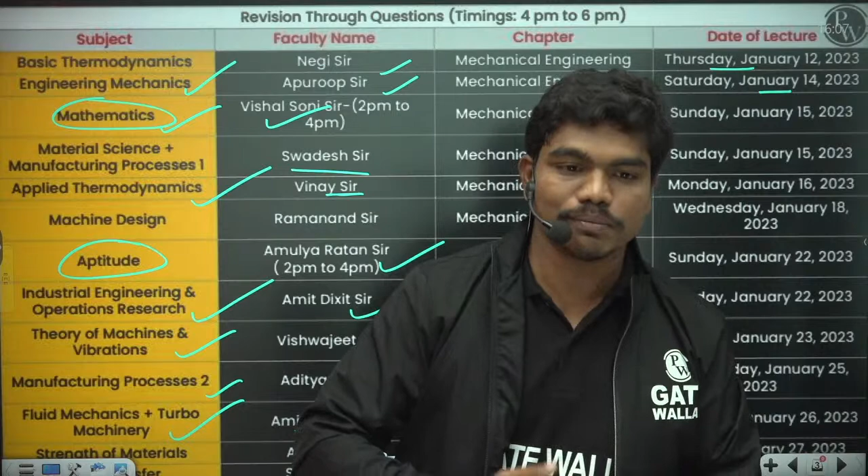Okay, so we will go in a very detailed way. You might have seen the previous sessions, which might have given you some good idea on how to solve questions and use concepts. In today's session we will go a step ahead in solving questions of applied thermodynamics.

This is our most powerful and tremendous team, a very good combination of people. For thermal, Negi sir, myself, Sandeep Chandrakar sir, and Amit Moya sir take care of this thermal module. For design, we have mechanics covered by Vinod Dasulia sir, Vishwajeet sir, Apuroop sir. For IE and OR, we have some of the best faculties in this GATE domain, like Swadesh Kumar Singh sir, Aditya Paul sir, and Amit Dixit sir, and machine design by Ramanand Bansal sir. We have a very good team.

Some of us have great exposure to industries. Previously, I was working with Hindustan Petroleum and then later with BARC. Similarly, many of our team members have very good industrial touch, so whenever we discuss concepts, we can give you real-time examples.

In today's session, I will also talk about gas turbine power plants, which I used to work on somewhere in HPCL. We'll discuss why we do intercooling and all these things on the go.

So, are you all ready? Shall we start these questions? Definitely, I have kept some questions matchable to GATE level, but a few questions are slightly more than GATE level. Okay, let's start the first question.

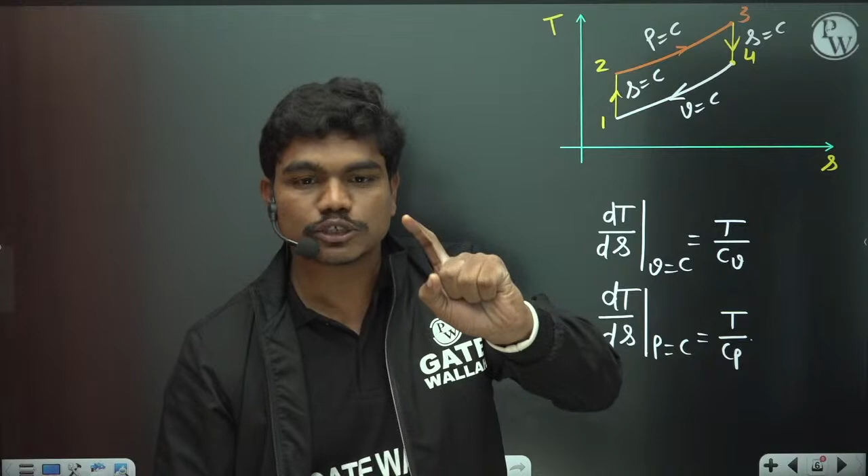The reason being, whenever Cp is greater than Cv, this quantity is low as compared to this quantity, so the slope should be higher for the constant volume line. This has to be made a note. Anyhow, these are the two curves.

Now let us see here. They are asking you initially the cutoff is at 5% of the stroke. So let us take the PV diagram also for our analysis, because this could also help you in talking about volumes. So pressure and volume, now we have a compression stroke.

Let us say this is the initial state of the volume. So we got a compression stroke actually here till this point 2. Then at constant pressure we do fuel supply. So this is point 3.

So we are doing constant pressure fuel supply. Then we have isentropic expansion again to state 4, and at constant volume heat rejection.

So here in this cycle we have work input and work output in the expansion stroke, and also some partial work output in this case. We have work output here as well. Then this is the stroke in which you are supplying the fuel, correct?

Now let us see, let us take the data given to us. Now 1, 2, 3, 4 and corresponding TS cycle. Now if you see, working on a standard cycle, the cylinder bore is 15 centimeters, meaning if you have the piston, the diameter of the piston is 15 centimeters, which is 0.15 meters.

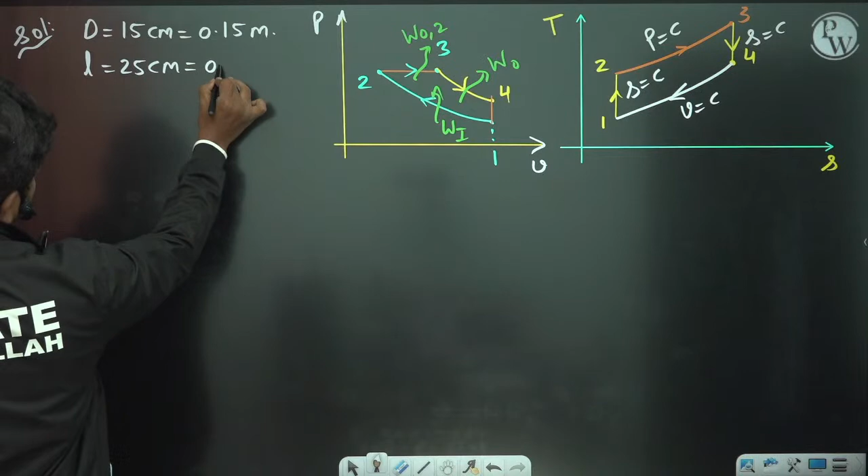Now if you see, the clearance volume is 400 centimeter cube. Clearance volume means, in this case, the piston actually moves in between these two volumes. So whenever the piston reaches here, this volume which is left is the clearance volume. So V2 I'm taking it as 400 centimeter cube.

Fuel injection is taking place at constant pressure for 5% of the stroke initially. So case 1: fuel injection is taking place up to 5% of the stroke. What is the meaning of this? Fuel injection takes place from this particular point to this particular point, so all over the movement of this piston, fuel is actually injected into the cylinder.

So V3 minus V2, where this is the span of fuel injection, this is 5% of the stroke. What is the meaning of 5% of the stroke? Stroke is this total volume, so therefore 5/100 times of V1 minus V2. This is the meaning of cutoff happens at 5% of the stroke.

Is this clear to all of you? Did you all understand how I wrote this equation? This is cutoff, meaning the volume up to which the movement of the piston, during which the fuel is injected into the cylinder, and this is the total cylinder swept volume.

So that's how V3 minus V2 is 5% of this particular value. Clear to all of you? Please type in the chat box, is this clear? Did you all understand how I wrote this equation? V3 minus V2 is 5% of the total swept volume. Clear? Okay, now let us see.

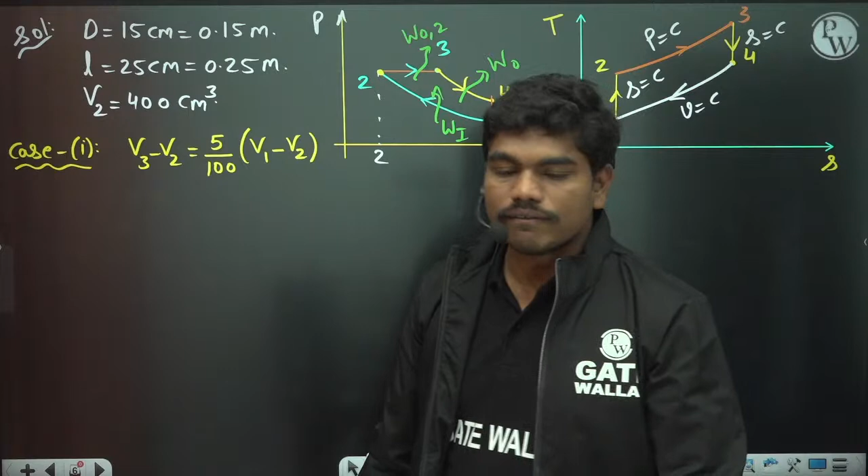This implies if you divide with V2, V3 by V2, which is the cutoff ratio minus 1, is equal to 5 by 100 times of V1 by V2 minus 1.

Now I will ask you one question, so please try to answer this. What is V1 by V2? Means if you take the ratio of volume at this location to volume at this location, what is V1 by V2 in this question? Or in general in any cycle, for example in any Air standard cycle, what is the ratio of V1 by V2?

Yes, very good. It is nothing but compression ratio, correct? So yes, compression ratio. This value is actually equal to the compression ratio R.

But you don't know what is the compression ratio. They didn't give you that in the question, correct? So how do you get the cutoff ratio here? They didn't talk about the compression ratio at all. Then how do you identify what is the cutoff ratio, I mean the compression ratio? How do you identify this?

Look, we have the length of the piston movement and the diameter of this cylinder, correct? So if you can calculate the swept volume, then the total volume available at the beginning of compression, which is nothing but V1, is nothing but V swept plus V clearance, correct? So we know R is equal to VT by VC. This V total can be written as V swept plus V clearance by V clearance.

Clearance volume is given to you, which is 400 centimeter cube. Now what is swept volume? Swept volume is pi by 4 d square. Since this is in centimeter cube, let us put this in centimeters. 15 square into 25, plus 400, divided by 400, correct? This is what you have.

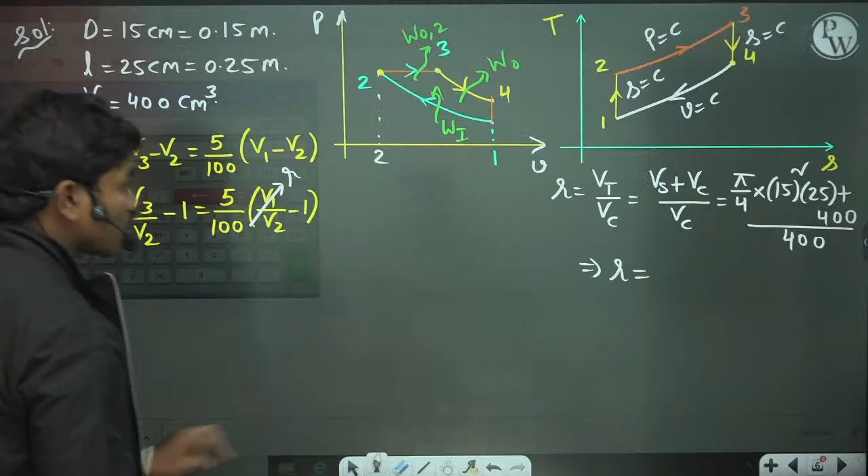15 square into 25 into pi by 4, this value plus 400, plus 400. This is the total volume divided with 400, gives you 12.04. So normally for compression ignition engines it is around 12. So 12.04. This is how we can calculate the compression ratio in this case.

So R is equal to 12.04. Clear? So whenever R is equal to 12.04, if you replace here, we get the cutoff ratio in this case. Rho minus 1 is equal to 5 by 100 times of 12.04 minus 1. So from this we can calculate cutoff. Let us say this is the first case. So rho 1 is equal to, we get some value here. Let us get this value.

2.128%, I think you're telling the final answer. Nikhil, is it? Are you telling the final answer, Nikhil? Let us see. By the time we reach the end, let us compare the answers.

So now if you see this value, 12.04 minus 1 into 5 by 100, so 0.05, this value plus 1. So cutoff ratio is 1.5522, or 1.552 to 3 decimals if you take for example. So this is the cutoff ratio in the first case.

Now let us talk about the second case. They have increased the cutoff from 5% to 8%. So here they are telling you that the fuel supply continues up to 8% of the stroke. So in second case, let us see what happens. Case 2.

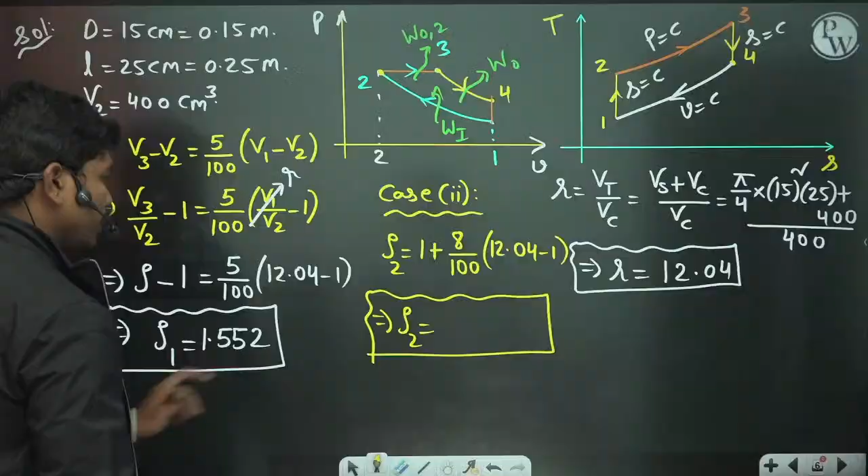So if you do this calculation, then rho 2 is equal to, what about rho 2? Let us see, rho 2 is how much? 12.04 minus 1 into 0.08, so this value plus 1. Plus 1, gives 1.8832.

1.8832. Correct. So this is the cutoff ratio here. Now we know the cutoff ratio. A compression ignition engine generally works on a standard diesel cycle. So what could be the formula for the thermal efficiency? Let us see. If you take a slide, for example. Fine, so let us see.

Thermal efficiency of diesel cycle is equal to 1 minus 1 by R power gamma minus 1 into rho power gamma minus 1 by rho minus 1. Correct, this is what we have. Yes or no? So all of you, please type in the chat box. Is this the formula for the thermal efficiency of a diesel cycle? Yes or no? Can you recollect this?

So please type in the chat box. Can you all recollect this? Thermal efficiency of a diesel cycle is given by this, where R is the compression ratio, rho is the cutoff ratio and gamma is the adiabatic index of the substance. Correct? Yes or no? Thermal efficiency is equal to 1 minus 1 by R power.

Sorry? Okay, sorry, I think I missed gamma. Okay, fine. This gamma is also there. Correct, gamma times of rho minus 1. Yes, correct, I think I missed gamma. So is this the correct formula? Please type in the chat box. There is also one gamma, correct? Okay. Yeah, gamma is missing in the denominator. Correct, I forgot to write gamma. So gamma times of rho minus 1.

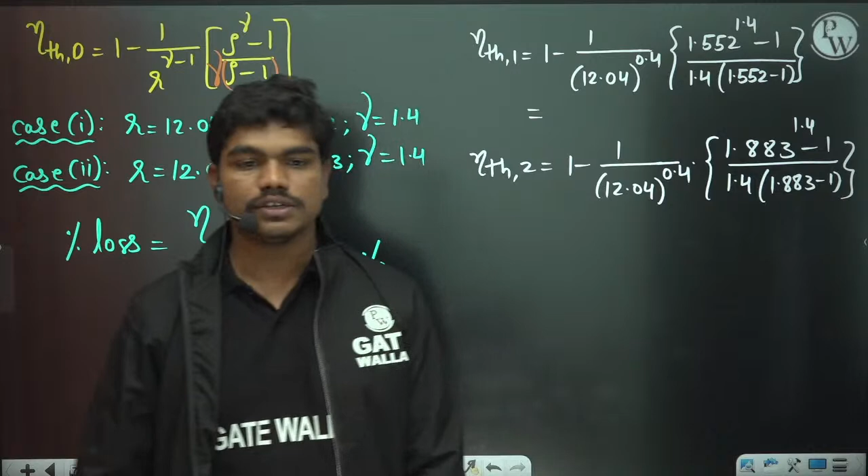Similarly, thermal efficiency of second case is 1 minus 1 by 12.04 whole power gamma minus 1 times of 1.883 power 1.4 minus 1 by 1.4 times of 1.883 minus 1. So this is what you have here. Let us compute these values. First of all, let us calculate the term 1.552 power 1.4 minus 1 divided by gamma 1.4 times of 0.552. So this is the value.

Now divide this value by 12.04 whole power 0.4. So this is the total value. Now subtract this value from 1. So 0.5933, correct? 0.5933, which is 59.3% almost. So please cross match the value. Is the first case efficiency 0.59? Please type in the chat box. Did you all get this? Is this clear to you? Are you all getting the same value here?

Now let us calculate the second case efficiency. Let us store this value for some time. Then let us calculate 1.883 whole power 1.4 minus 1 divided by 1.4 times of 0.883. If you do this, 1.15. Now divide this with 12.04 whole power 0.4, so this gives you 0.426. Subtract this from 1, and you get 0.5738, so 57.38%. Clearly 0.59 is higher than 0.57, so efficiency already came down.

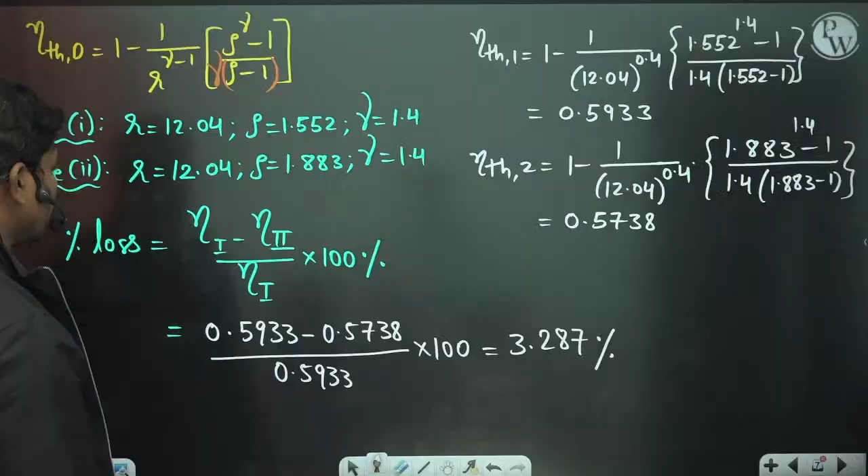Now let us see what is the percentage drop. 0.5933 minus 0.5738 divided by 0.5933 multiplied with 100. Subtract this new value from the stored value, divide with the previous value, into 100. This gives you 3.287%. Into 100 we have already done. So 3.287% is the efficiency fall when you have increased the cutoff to 8%, correct? Please type in the chat box. Is this clear to all of you? Did you all get a 3.28% fall in the efficiency of the cycle? Yes or no?

Okay, got it? I think someone told 6 point. I think there could be some calculation problem there. Okay, now I'll ask you one question. Try to understand this. Let us suppose, if you look, this is the formula for the thermal efficiency, of course multiplied with gamma. Now one question I want to ask you.

Let us suppose cutoff ratio is tending to 1, means cutoff ratio is almost equal to 1, then what happens to this term? Please tell me. We'll go to the next question, it's okay, but try to understand something here. If you put cutoff ratio almost equal to 1, cutoff ratio tends to 1, then what happens? What is the thermal efficiency in that case?

Will this fraction exist when you put rho equal to 1? For example, when you put rho equal to 1, will this fraction exist? No, correct? It won't exist. But what is the meaning of this cutoff ratio equal to 1? Look, try to understand here. When rho tends to 1, because I want to discuss one point here.

When rho tends to 1, one thing is very clear, rho power gamma minus 1 by gamma times rho minus 1, this value tends to 0 by 0 form, correct? This gives you 0 by 0 form. Now whenever a fraction is giving 0 by 0 form, what do you do generally in mathematics? You might have seen some limits. If you are getting a 0 by 0 form, then what will you do? L'Hospital, correct? Very good. So you will apply L'Hospital rule here.

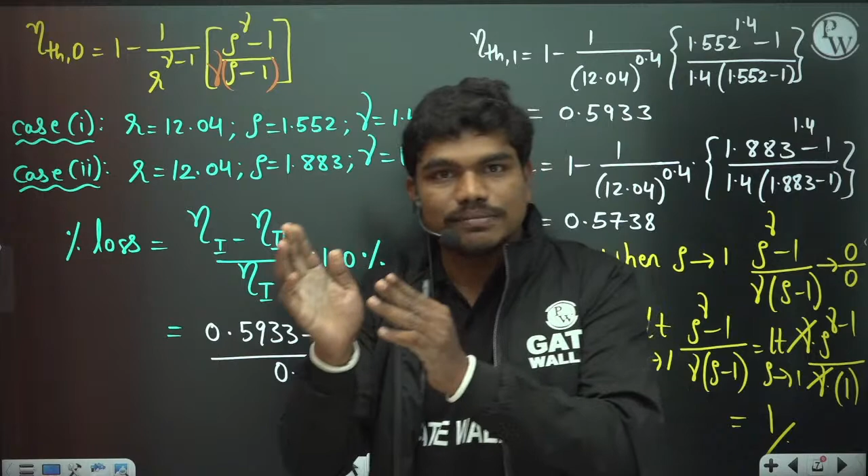Otto cycle, correct? Yes. So whenever cutoff ratio is tending to 1, the cycle converts from diesel to Otto cycle. How does it happen physically? I will tell you. Whenever you are injecting fuel, there is a movement of the piston, correct? So see here carefully. When rho is tending to 1, what is the physical meaning of that? Rho is V3 by V2.

You know this, correct? Whenever this value is tending to 1, can I say V3 is tending to V2, which means V3 and V2 are almost the same? Can I say V3 and V2 are almost the same whenever rho is tending to 1? Yes or no? Correct? Whenever rho tends to 1, V3 and V2 are very close to each other.

Now, tell me this. Whenever V3 and V2 are very close to each other, during your fuel injection, during your heat addition, your piston is not moving by a sufficient amount. Yes or no? Your piston has moved a very small amount, which means the heat addition is happening at constant volume. Because if V2 and V3 are very close, physically during fuel injection the piston is not moving. So you are actually adding the heat at very small volume change.

So you can approximate that as heat addition at constant volume. That's the main difference between the operation principle in diesel and Otto cycles: the process of heat addition. So whenever rho is very much close to 1, then definitely the heat addition is at constant volume. That's how physically a diesel cycle gets converted to an Otto cycle. And formula-wise you can see this formula gets converted to the efficiency of an Otto cycle.

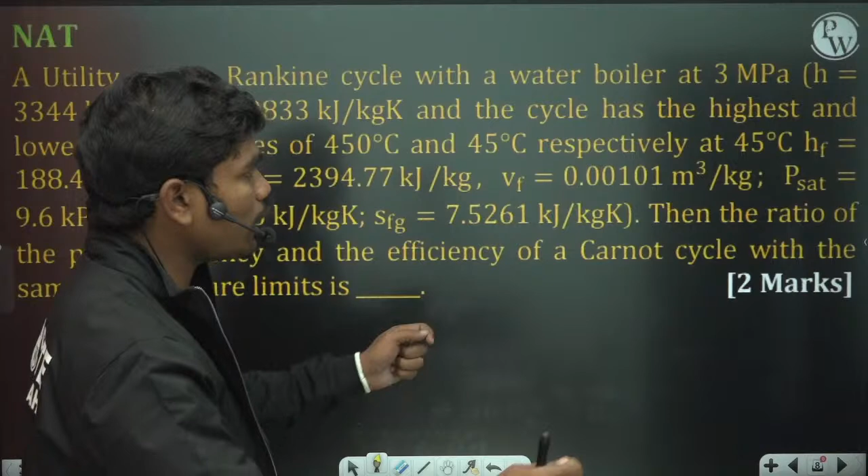So let us solve this question. A utility runs a Rankine cycle with a water boiler at 3 megapascals. The specific enthalpy at the boiler is 3344 kilojoule per kg, and S is 7.0833 kilojoule per kg K, and the cycle has the highest and lowest temperatures of 450 degrees Celsius and 45 degrees Celsius respectively. At 45 degrees Celsius, hf, hfg, vf, P saturation, sf, sfg values are given. So properties of the steam are given at 45 degrees Celsius.

Then the ratio of plant efficiency and the efficiency of a Carnot cycle with the same temperature limits is blank. So first of all, whenever the Carnot cycle is operating between the same temperature limits, you know heat addition and heat rejection happen at constant temperature in a Carnot cycle, correct? So let us see.

First of all, let us try to plot this Rankine cycle. It is running a Rankine cycle with a water boiler at 3 megapascals, and this cycle has the highest and lowest temperatures as given. Then the ratio of plant efficiency. So first, let us plot a TS diagram for the Rankine cycle. Let me draw this a bit lower, since I have some things to plot. Now let us put the dome. So TS.

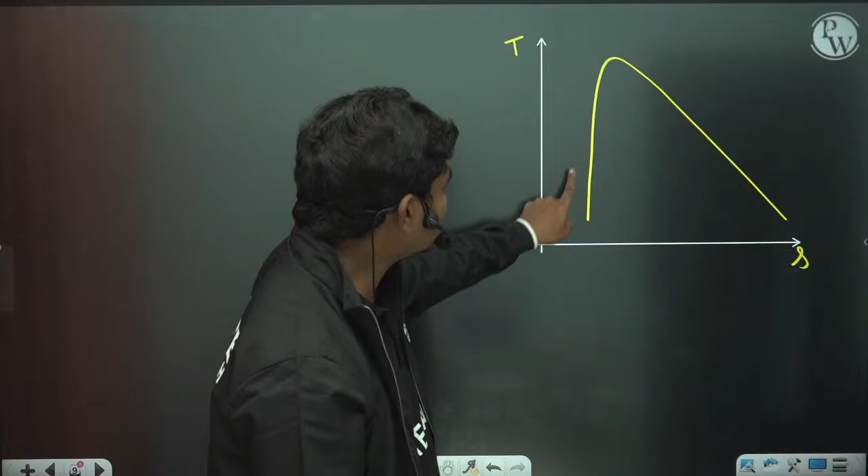Especially in refrigeration cycles, whenever refrigerants are analyzed using this TS diagram, this curve plays a very important role. There is something called the superheat horn, and you have some loss in refrigeration effect. These losses and the superheat horn depend exclusively on the shape of the curve. So this shape is important. On the left-hand side we have liquid phases, which do not show much change in properties, so it is almost a vertical line, but on the right we have a slanted, expanded line.

Now if you see the condenser limits and boiler limits, let us suppose the condenser is somewhere here, and you have a boiler here. So this is P boiler, the pressure at which the boiler is operating, and this is the pressure at which the condenser is operating. Now you have a normal Rankine cycle. There is a pump which takes the fluid from low pressure to high pressure.

If this is state 1 and this is state 2, now along the constant pressure we are heating the system, supplying heat to it. So we get somewhere here, state 3. Then from here we expand isentropically in a turbine.

So this is location 3, and 3 to 4. Let us keep this point 4, since 3 we have already used. And 4 to 1 we have condensation: before sending the fluid back to the pump, we condense it.

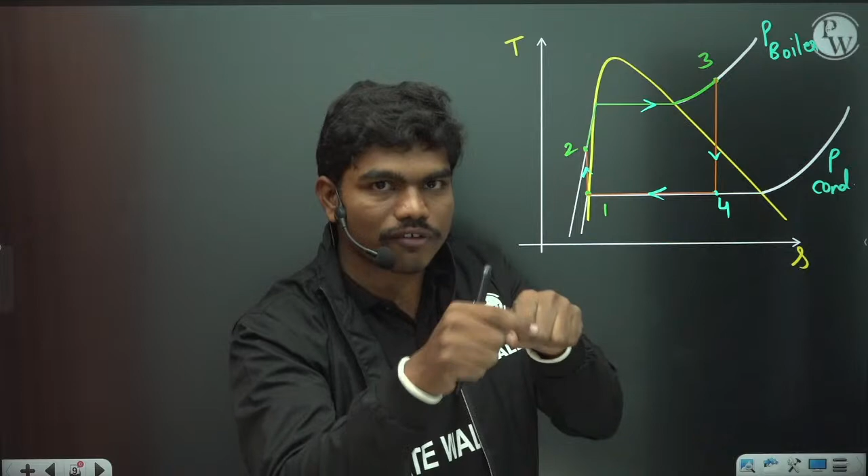Now tell me one thing, you have a condenser here. Outlet from the turbine enters the condenser, and again saturated liquid comes out of the condenser. Practically speaking, heat supplied to the boiler and the work output of the turbine actually matter to you. This heat rejection does not matter, yes or no? Because the amount of rotation for the turbine is due to the work done in this expansion process. So this heat rejection is not much significant for you.

So I have one idea. Let us suppose, instead of running this plant by putting a condenser here, I have a very large fresh water source. Then can I leave the outlet of the turbine into that lake and again pick some new water for the pump? Can I do this?

Basically, instead of having a condenser here, I will put a large lake. Fresh water lake, no impurities, nothing, so that I will put my exit of the turbine into that lake and take the inlet for the pump from some other location. Can I do this? Is there any mandatory need of the condenser in the power plant?

What happens if you take off the condenser? Boiler is important and turbine is also important. Once the steam comes out of the turbine, your purpose is solved, you don't have any use out of it, because it is getting rejected in the condenser. Then can you run a power plant without the condenser? If you cannot, then what is the problem? So please tell me.

Did you all understand my question? Please type in the chat box. Why is it mandatory to use a condenser in a power plant? Or if it is not mandatory, then please justify. What can you do? Any idea?

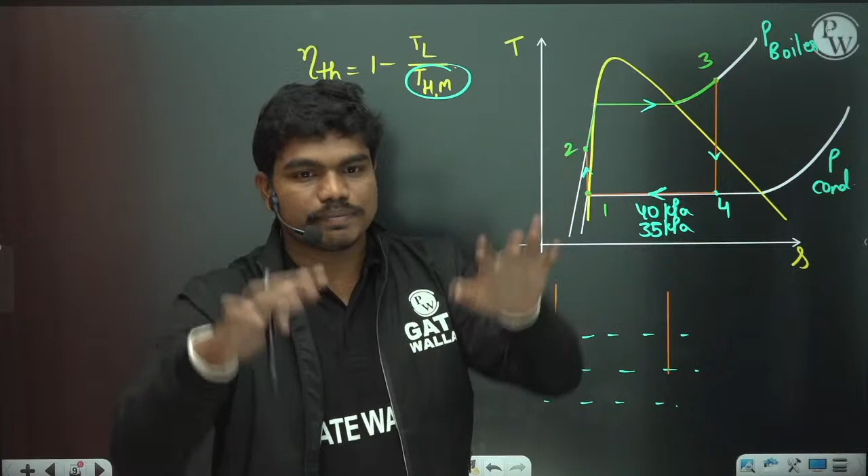Okay, so whenever this heat rejection happens at this particular range, the saturation temperature corresponding to this pressure is lower than the saturation temperature at atmospheric pressure. When I am leaving the exit to the water, condensation is happening at atmospheric pressure, because it is open to atmosphere. But when you are putting a condenser, you are actually bringing the system to much lower pressure, so that this saturation temperature of phase change is less, so this TL is less. So if TL decreases, this temperature value decreases, so thermal efficiency of the plant increases.

And of course, if you can also see, whenever this constant pressure line, instead of 40 kilopascals, is at 100 kilopascals, something like this, then your turbine does expansion only from this point to this point, then this amount of work is lost, but the boiler heat what you are supplying is same. So for the same heat supply, you are losing some part of work here. That's why practically you cannot remove the condenser. By removing the condenser, you may feel that condenser cost can be saved, but your efficiency of the cycle falls drastically. Clear?

Okay, so did you understand? Because this is one very famous question in many of the interviews, that they'll ask you why condenser is mandatory in a power plant. This is the reason, and the answer is from the second law of thermodynamics point of view. Clear? So is this clear to all of you? Did you understand how turbine work output falls and the cycle efficiency falls as I said?

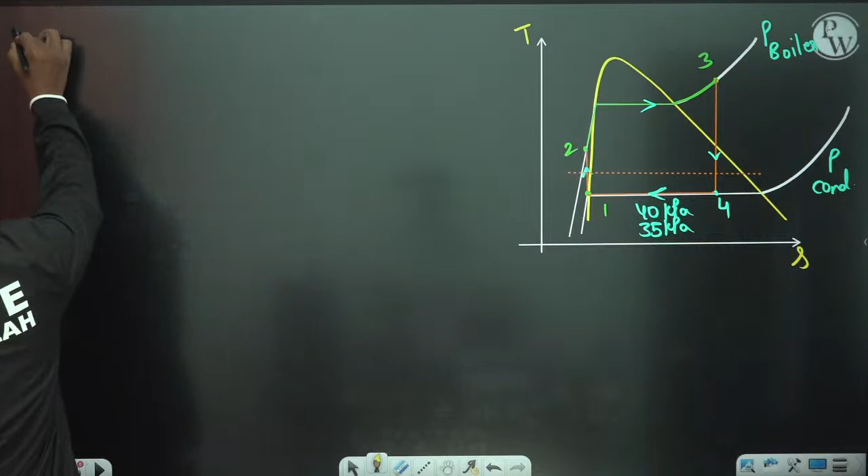Okay, now let us solve this question. These are some points I thought of discussing when I'm talking about Rankine cycle. So let us see. First of all, whenever Carnot cycle is operating between same temperature limits, T max is 450 degrees Celsius, which is 723 Kelvin. Because 450 plus 273 gives you 723. And T minimum is 45 degrees Celsius. So 45 degrees Celsius is equal to 273 plus 45, so 318 Kelvin. Now, if Carnot cycle is operating between these two temperatures, what is Carnot efficiency?

Efficiency of Carnot is equal to 1 minus T minimum by T maximum. So this is 1 minus 318 by 723. So let us do this calculation, all of you. 318 by 723, take a negative of this and add 1. So 56% almost, 0.5601. 0.5601 is the efficiency of the Carnot, almost 56% efficient.

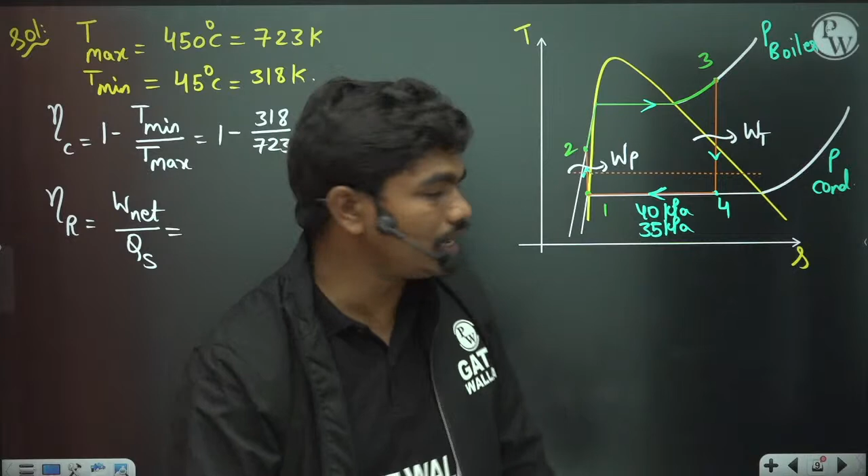In a Rankine cycle, we generally neglect the pump work. The reason is, since pump is an open system, the work interaction of a control volume is minus integral VdP. Here the pressure ranges from condenser pressure to boiler pressure. But this specific volume will be very less because pumps handle liquids, and in liquid phase the density is very high, which means the specific volume, the reciprocal of density, is very low. For water, density is 1000 kg per meter cube, so specific volume is 10 power minus 3. That's why the pump work in Rankine cycles is generally neglected.

If you asked about the compressor in Brayton cycle, can you neglect the compressor work in Brayton cycle? Type in the chat box. Can you neglect the compressor work in the Brayton cycle? Can you neglect it?

Can you neglect compressor work input in case of Brayton cycle?

Yes, we cannot neglect it. Because compressors handle gases, and for gases densities are very low and specific volume is comparatively very high. Here specific volume is 0.001 almost, but if you take substances like air, then it is around 0.96 to 0.98 of that range. So you cannot neglect it actually.

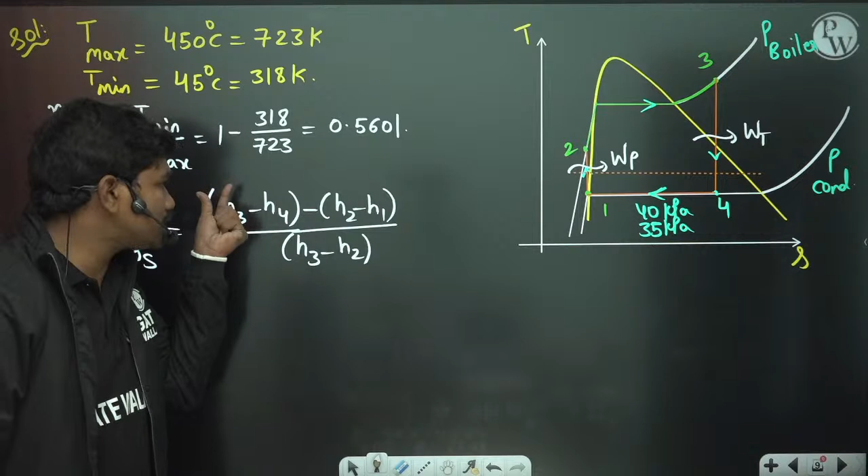For example, if you write the formula completely, heat supplied is H3 minus H2. This is the enthalpies, this is the work which is produced. This is the work interaction which happens in this turbine, and this is the work interaction of the pump, and this is the heat addition in case of a boiler.

Now let us talk about the things. HF is given as 188.42 and HFG is given as 2394.77. VF, VG are also given. It runs on a Rankine cycle with a water boiler at 3 megapascals. At that condition, at superheated condition, this is specific enthalpy and this is specific entropy. Let us see this pump work.

If you neglect this pump work, since pressure values are given, right? P saturation is also given at this condition. P saturation is 9.6 kilopascals. Let us not neglect, let us take this pump work also into consideration.

H2 minus H1. So first of all, what is H2 minus H1? Let us calculate. H2 minus H1 is equal to, since this is running on water, V into P boiler minus P condenser. So what is P boiler minus P condenser?

Specific volume of water is 10 power minus 3. Boiler is operating at 3 megapascals, which is 3000 kilopascals, minus P saturation at the condenser, which is 9.6 kilopascals. Such a low pressure, 9.6 kilopascals. So this answer, if you take in kilojoule per kg, then 3000 minus 9.6, divided by 1000, gives 2.99.

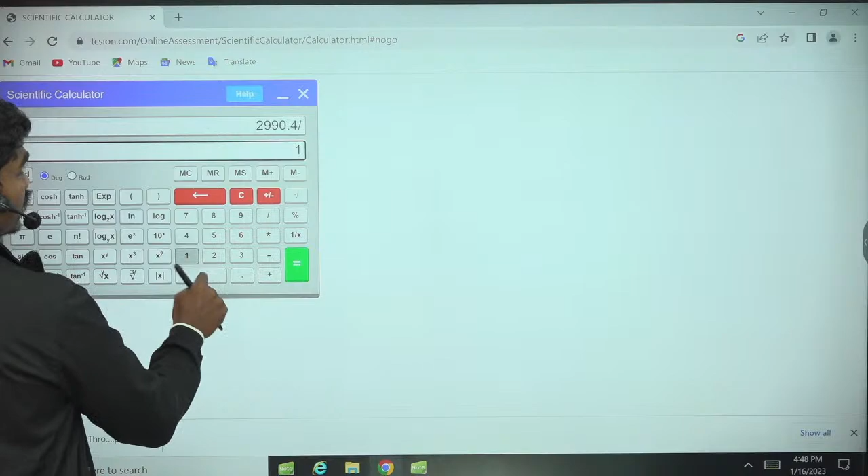Kilojoule per kg. Then W, or generally H3 minus H4. Now to calculate H4, we should know one very important parameter, which is called the dryness fraction. We should understand what is the dryness fraction at this location. So how to calculate this dryness fraction?

We can write, if you equate specific entropy at location 3 and location 4, you can get the dryness fraction. So S3 is same as S4. What about S3 at the exit of the boiler? 7.0833. This is equal to, at this saturation condition, SF is 0.6386.

0.6386 plus dryness fraction at that location into SFG. So what is SFG value? 7.5261. So this implies X, dryness fraction, is equal to 7.0833 minus 0.6386, this value divided by 7.5261.

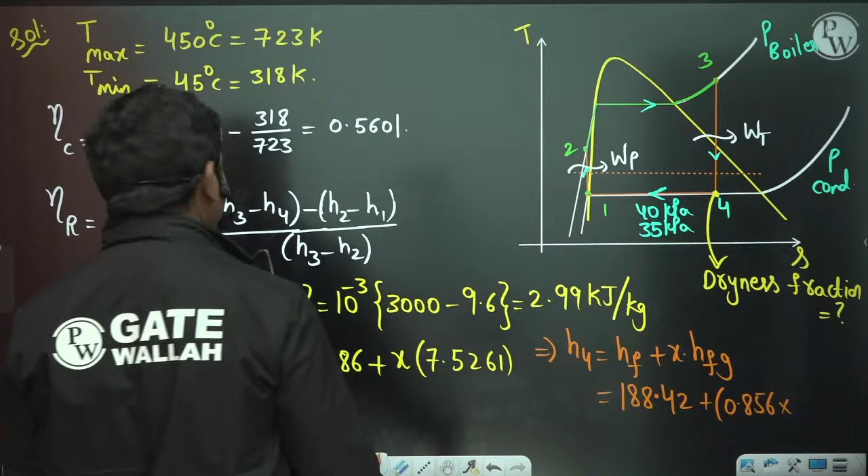188.42 plus X, dryness fraction 0.856, into HFG. So what about HFG? HFG in this condition is 2394.77. So if you simplify this, then we get H4 value, in kilojoule per kg again.

So let us do this. Dryness fraction multiplied with 2394.77, so 2050, plus 188.42, so 2239.09 kilojoule per kg. So we know H4 value. H3 value they have given you.

H2, so how to calculate this H2? HF plus this work input to the pump. Specific volume they have already given as 0.001, almost, because density of water is 1000, so reciprocal of that is this value. Now if you put all these terms together, Carnot efficiency.

So what about Carnot efficiency? Let us see.

Carnot efficiency, Rankine efficiency is what we want. Rankine efficiency is equal to H3 minus H4.

So what about H3? This value 3344, minus H4. What about H4? 2239.1, minus pump work. What about pump work? 2.99, you can write 3, almost 0.01 doesn't give you much difference, divided with heat added in the boiler.

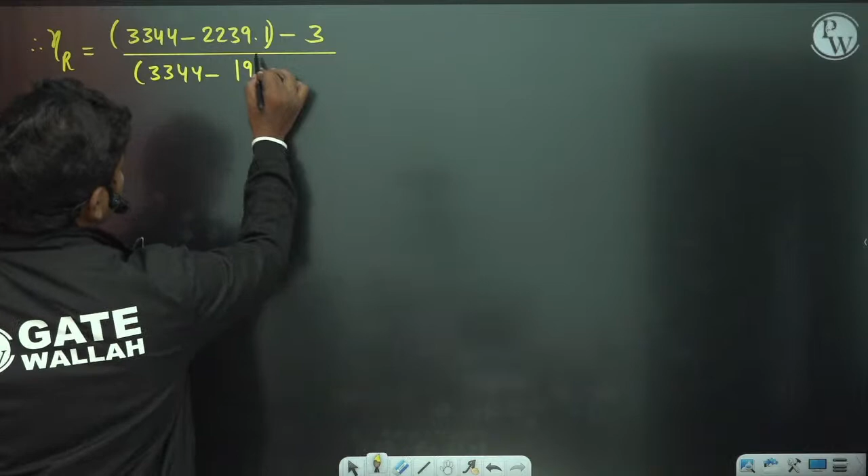So this gives you the thermal efficiency of this cycle, of the Carnot cycle, of this Rankine cycle.

So therefore thermal efficiency of Rankine cycle is equal to, let us calculate this value. So let us calculate 3344 minus 2239.1

minus, okay so minus 3, so this value divided with 3344 minus 191.42, so 0.3495

0.3495, so 35% almost. So this is 0.3495, so the Carnot efficiency is around 0.56 we got, and Rankine efficiency is 0.3495 actually.

So therefore efficiency of Rankine to efficiency of Carnot, correct? This is what they are asking in the question. So they are asking you the ratio of plant efficiency and efficiency of the Carnot cycle. So plant efficiency is this, whatever we have calculated.

0.3495 divided with, we got some value here for the Carnot cycle, 0.5610, correct, 0.5601. So this value divided with 0.5601, so 0.624 is the ratio in this case.

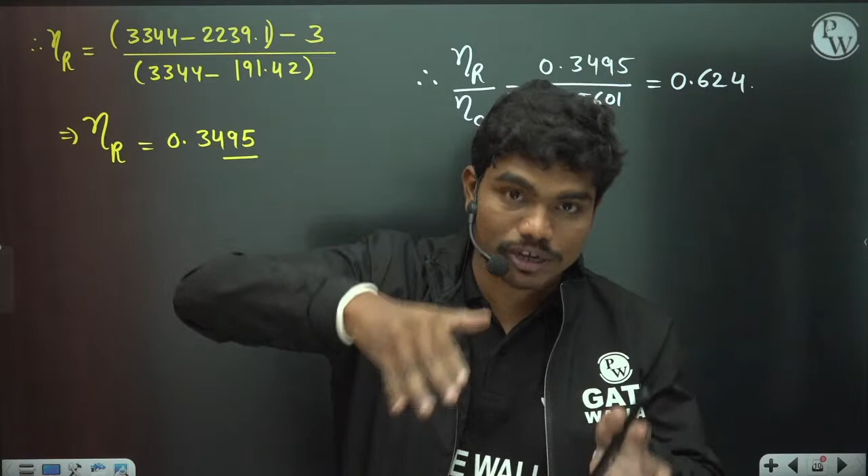So in Carnot assumption, we assume complete heat is transferred at constant, uniform temperature. But in case of Rankine cycle, at one particular point you are touching 450, that's it. Remaining maximum amount of heat is added at low temperature. So heat addition at low temperature is not as effective as heat addition at higher temperature. This is based on the concept of availability, so that's why definitely Carnot has maximum.

If you look, Carnot says all reversible cycles have equal efficiency operating between same temperature limits, but here the heat addition is actually changing. Here you are not adding the heat completely at 450 degrees Celsius, you are adding only a very little part at 450 degrees Celsius, and all the remaining part at low temperature. So that's why Carnot efficiency will definitely be more than this Rankine efficiency.

Clear? Your concept of availability actually answers this. And one just practical thing I want to tell you before going for the next question.

We'll move for the next question, but just one thing: this dryness fraction at the exit of the turbine is very important. This X value is normally maintained 85 to 90%, or sometimes in case of reheating, 93% and above, but practically this X is very important actually.

Because when you change, let us suppose if dryness fraction is low, that means this turbine, instead of hitting this point here, the turbine point hits somewhere here. Whenever the point shifts from this location to this location, the dryness fraction of the steam actually decreases. So what is the meaning of this decrease in the dryness fraction? Whenever dryness fraction decreases, the liquid molecules, meaning the liquid phase molecules in the steam, increase.

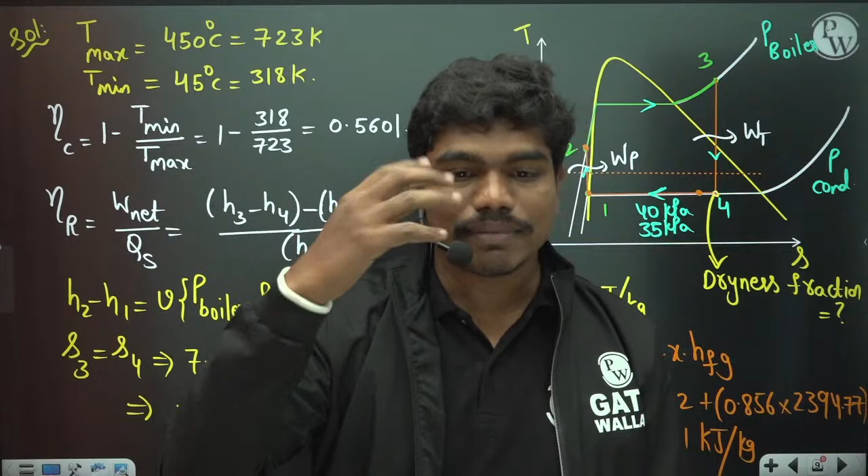Blade erosion is one very common problem. You generally do maintenance all the time. When I was in HPCL, we were maintaining some pumps. Pumps get, sometimes you don't even imagine the view of the pump after getting eroded. It's almost like half of the material is blown off from the pump. So basically liquid particle hitting is very, very dangerous in any equipment.

So that's why maintaining the dryness fraction during the expansion process in the Rankine cycle is very, very important. Clear to all of you? So are you all clear with this question?

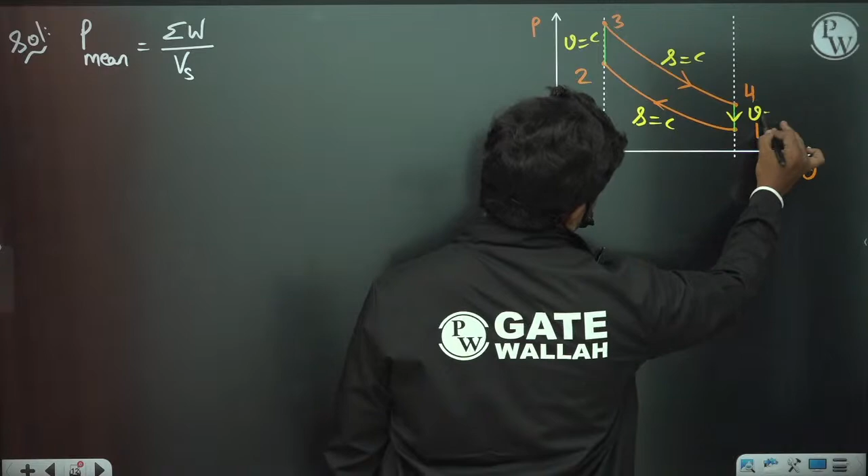Now let us see, they have given you certain quantities at the beginning of the compression. Let us write the points: isentropic compression, constant volume heat addition, isentropic expansion, and constant volume heat rejection. Now we know that at the beginning of the compression, P and T are these values.

So P1 is equal to 90 kilopascals, and what about T1? T1 is 283 Kelvin. Okay, so this is 283 Kelvin. Then the mean effective pressure.

So to calculate mean effective pressure, we should know what is the net work interaction happening in this cycle and the Vs. Here if you see, net work interaction is equal to net heat interaction of this cycle anyhow—sigma W. So compression work and work out.

Okay, so we know sigma W is equal to work out minus work in, which is, if you do for specific terms, Cv times of—outlet is from 3 to 4, so T3 minus T4—minus Cv times of this inlet, since you have taken minus sign already, T2 minus T1 divided by... okay, so this is the work.

And Vs is how much? If you take specific here, then here also it can be taken specific. So the swept volume is V1 minus V2, correct? Now V1 minus V2. So let us see, the substance is air.

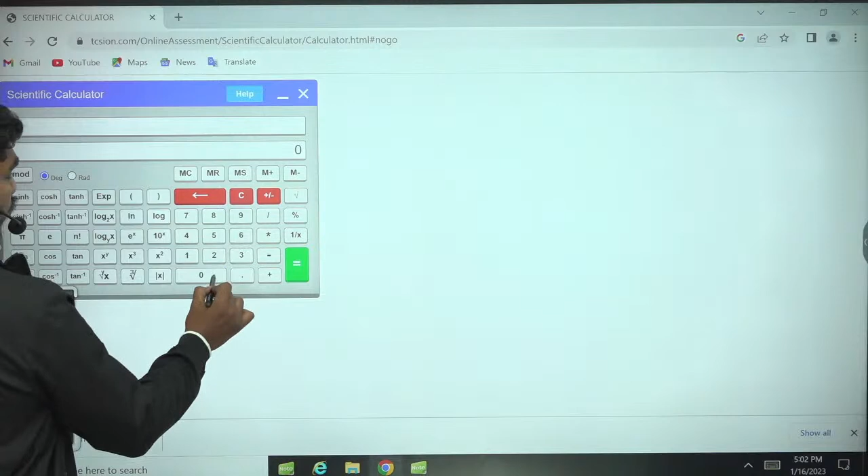...or PV is equal to RT. So RT1 by P1, which is 0.287 into 283 by P1, which is 90 kilopascals. So this is in some meter cube per kg. Now let us calculate this value: 0.287 into 283 by 90. So 0.902. Correct? 0.287 into 283 divided by 90.

So what about V2? They have talked about compression ratio, given as 7. So R is equal to 7. This implies V1 by V2 is equal to 7, so V2 is V1 by 7. If you divide this value by 7, then divided by 7 gives you 0.1289, that is 0.129 meter cube per kg.

So T1 is known to you. You don't know what is T2. How to get T2 value? Let us see, for process 1 to 2. Or better, let us do one more thing. They have given heat addition, correct? Heat addition of 1800 kilojoule per kg. So we know thermal efficiency.

Thermal efficiency of Otto is 1 minus 1 by r power gamma minus 1, which is W net by QS, heat supplied. Correct? Can we take this relation? Yes or no? So please type in the chat box. Can I use this relation? W net by QS. Can I use this?

Because thermal efficiency formula is basically, for the amount of heat input, what is the maximum net work output you are taking out of the engine. Correct? So can I use this expression? Yes or no? So type in the chat box. Can I use this? Because we have the compression ratio and it's an air standard cycle, so we know gamma.

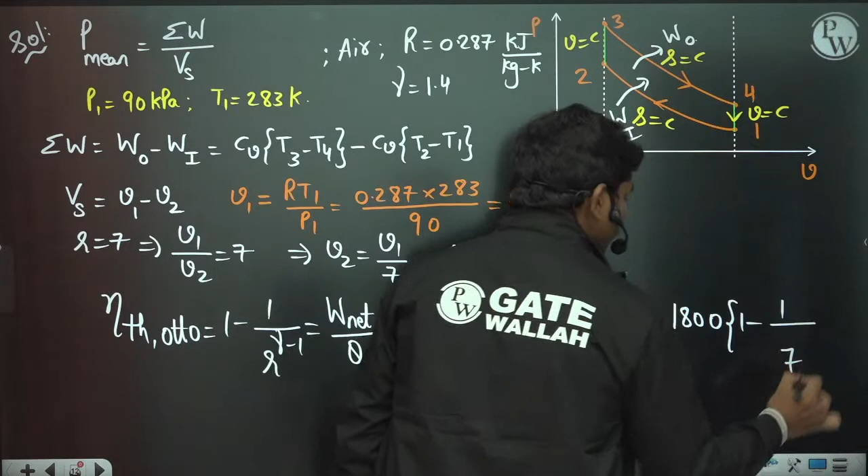Okay. So when you use this, this implies your W net is equal to QS times 1 minus 1 by r power gamma minus 1. So if you substitute QS, it is given the heat addition of 1800 kilojoule per kg. So 1800 into 1 minus 1 by compression ratio 7 power gamma minus 1, 1.4 minus 1. So this gives you W net. This is in kilojoule per kg, because this is also in kilojoule per kg.

So if you perform this calculation, let us perform 7 power 1.4 minus 1, 0.4. Then reciprocate this, subtract this from 1, and multiply with 1800. So 973.52 kilojoule per kg. So this is the net work interaction in that case. Whenever this is 973.52 kilojoule per kg, then V1 and V2 values are known, so V1 minus V2 can be calculated.

Therefore, mean effective pressure in this calculation is W net by V1 minus V2. Since this is in kilojoules per kg, answer will be in kilopascals. So 973.52 divided with 0.902 minus 0.129. Whatever you get, that will be in kilopascals, because this is substituted in kilojoule per kg. Clear? So let us perform this calculation.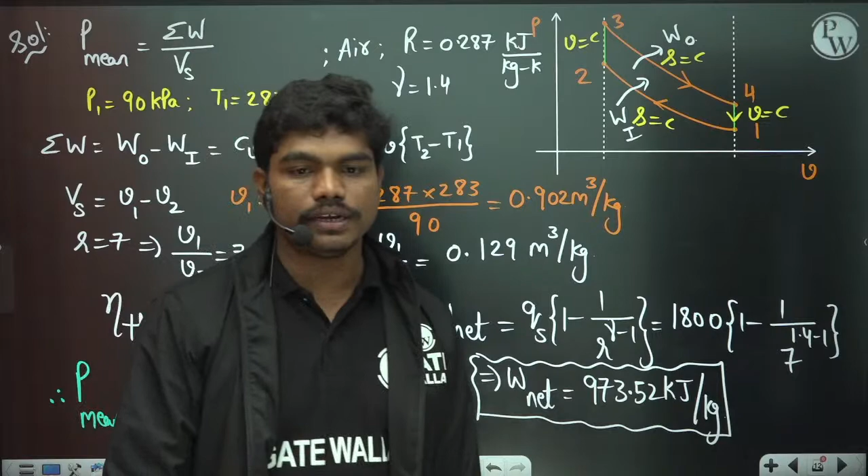973.52 divided with 0.902 minus 0.129. So this gives you 1259.4 kilopascals. Clear? So let us see. We have got some options here. 1258. They might have taken some decimals, maybe 2 decimal places or something. So we got a little difference, but that could be compensated. So 1259.4 kilopascals is the mean effective pressure acting on the piston.

So physically, what is mean effective pressure? Normally during the expansion stroke, the work production stroke, the pressure on the piston actually varies. So we assume there is some uniform pressure acting on the piston throughout the expansion stroke for producing the same work output. That's what we call mean effective pressure. So around 1260 kilopascals. Is that clear to all of you? 1259 kilopascals almost, so that could be the correct answer. Next, let us go for the next question.

A steam power plant operates on an ideal reheat Rankine cycle between the pressure limits of 15 megapascals and 10 kilopascals. Steam enters the high pressure turbine with specific enthalpy of 3310.8 kilojoule per kg and then enters the reheater with specific enthalpy of 2817.2 kilojoule per kg. This reheated steam enters the low pressure turbine with specific enthalpy of 3466.61 kilojoule per kg. The properties of the condensed water, HF, VF and HFG values, are given.

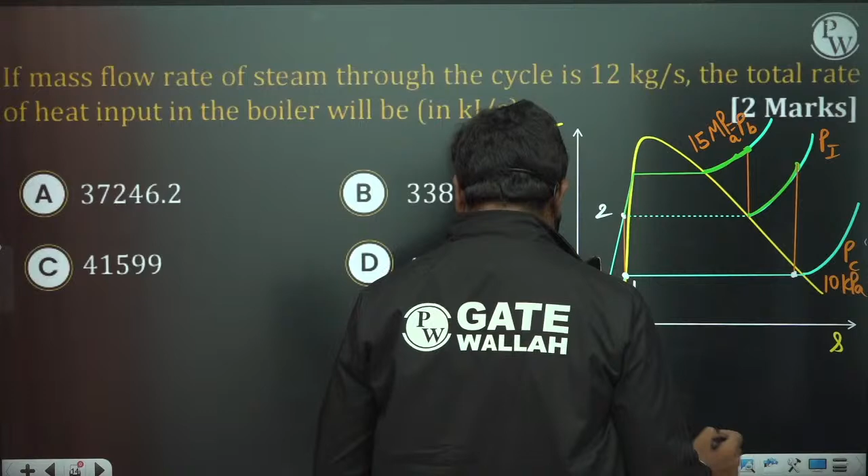Steam enters in high pressure turbine and then enters the reheater. This reheated steam now enters the turbine. Temperatures they haven't mentioned; they talked about only enthalpies. So they have again heated this to some particular enthalpy and then expanded in a turbine. As I told you, in case of reheating, dryness fraction generally increases. And finally it got condensed. So they're asking you what is the total amount of heat supply.

So let us see. This is state 3, initial first stage of expansion in high pressure turbine. Then in low pressure turbine, again you have expanded this, and this is state 6. Now what is the total heat that you have supplied? QS is equal to mass flow rate of the substance into, first of all, heating in the boiler, H3 minus H2. Then again you are heating in the reheater, so H5 minus H4.

Now let us see: H3 minus H2 plus H5 minus H4, right? Good. So m dot, what is the mass flow rate to the boiler? 12 kgs per second. So 12 kgs into H3. So what is H3? Inlet to the high pressure turbine, correct? So how do you decide which is high pressure turbine and which is low pressure turbine? Depending upon the steam entry.

Steam is entering here at 15 megapascals pressure, but steam is entering this turbine at some intermediate pressure which is less than 15 megapascals. So depending on the inlet condition of the steam, we decide which is high pressure turbine and which is low pressure turbine. H3 is inlet to the high pressure turbine. Steam enters in high pressure turbine with a specific enthalpy of 3310.8. So H3 is 3310.8 kilojoule per kg.

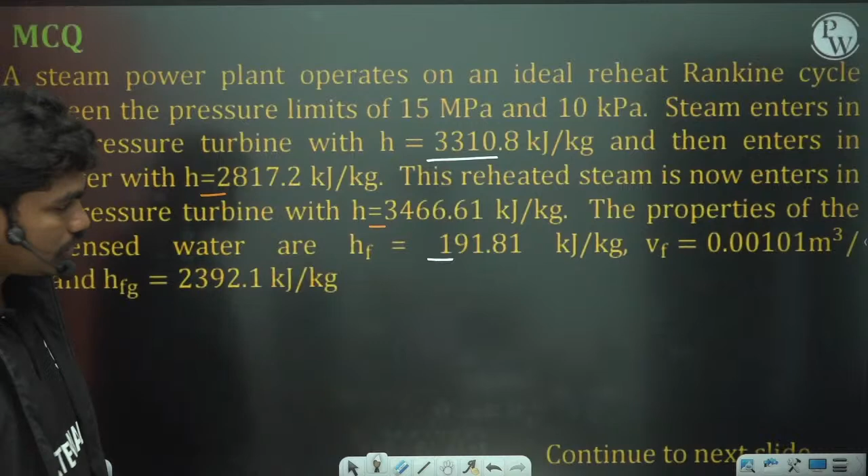0.00101 into 15 megapascals, which is 15,000 kilopascals, minus condenser pressure. The condenser is operated at 10 kilopascals. If you perform this calculation, we get the answer in kilojoule per kg. So please do along with me. 15,000 minus 10 is 14,990. 14,990 times 0.00101 is 15.14 kilojoules. Plus 191.81, so 206.95 kilojoule per kg. This is the specific enthalpy at location 2.

H5. So what about H5? H5 is inlet to the low pressure turbine. Let us check this question. This reheated steam now enters a low pressure turbine with specific enthalpy of 3466. So H5 value is 3466.61 kilojoule per kg.

61 kilojoule per kg. Okay, and what about H4? H4 here is the entry to the reheater. Okay, so let us see. It enters the reheater with specific enthalpy of 2817.2. So this is 2817.2 kilojoule per kg. So we got all the values. Three values are directly given to you.

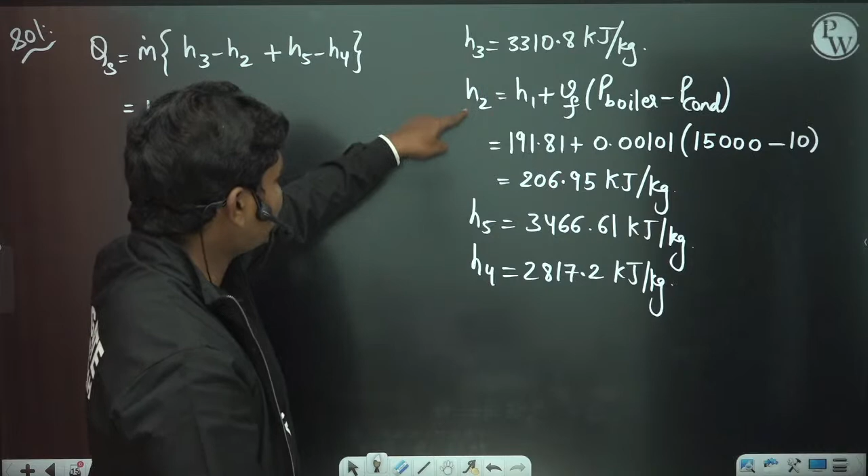Look, when you try to visualize what's happening in the Rankine cycle, you can easily identify the locations and what state they are talking about. So if you substitute H3, H2, H5 and H4 values: H3 3310.8 minus H2, which is 206.95, plus H5 3466.61 minus 2817.2. The answer is going to be in kilowatts because this is in kgs per second and these are in kilojoule per kg.

So let us perform this calculation. 3310.8 minus 206.95 plus 3466.61 minus 2817.2. So this is the value, multiplied with 12. If you multiply this value with 12, you get 45039.1 kilowatts. So this is the amount of heat you have supplied. Almost 45 megawatts of heat is what you are supplying into the boiler.

Clear? Normally that's the case. In power plants, the amount of heat will be in megawatts. That's why, when you see carefully, the pressure of the boiler is maintained at some constant value. If the pressure falls slightly, then it will be very difficult, because obviously the availability of things changes. So that's what we have.

So let us check the options. I think there are a few options to this. 45039. Yes, we got the exact value. 45039.1 kilowatts. So this is the correct answer in this case. Clear?

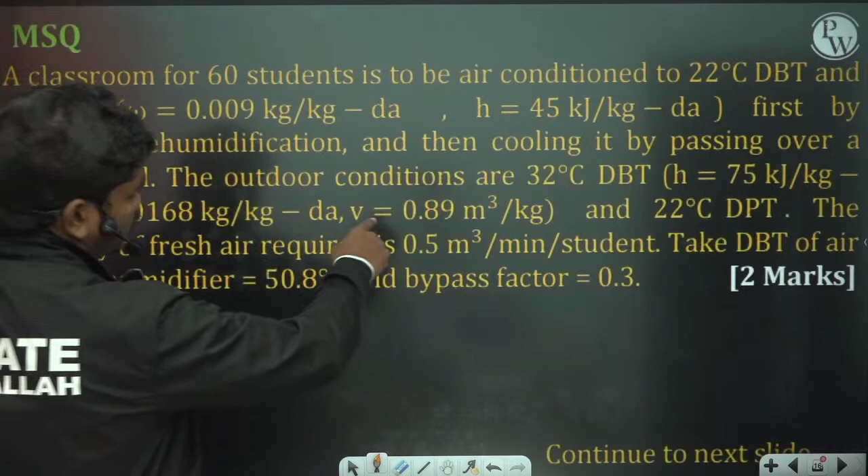The outdoor conditions are 32 degrees Celsius dry bulb temperature with specific enthalpy, omega, specific volume, and 22 degrees Celsius dew point temperature. The quantity of fresh air required is 0.5 meter cube per minute per student and the class consists of 60 students. Take dry bulb temperature of air after dehumidification as 50.8 degrees Celsius and bypass factor as 0.3. So good question.

So what are the things of interest? Capacity of dehumidifier, capacity of cooling coil, apparatus dew point temperature, capacity of the cooling coil. This is one contradicting option. Fine, so let us see. First of all, guys, look here. There is a dehumidifier and there is a cooling coil also. Finally this is sent to the classroom.

Air is taken from the atmosphere, then it is dehumidified, then sent to the cooling coil and then sent to the classroom. Here it is atmosphere, so it is taken from atmosphere. What are the conditions? 22 degrees Celsius dry bulb temperature and 55% relative humidity, this is required. So the conditions you need are 22 degrees Celsius and 55% relative humidity. This is the required air at the classroom for the students.

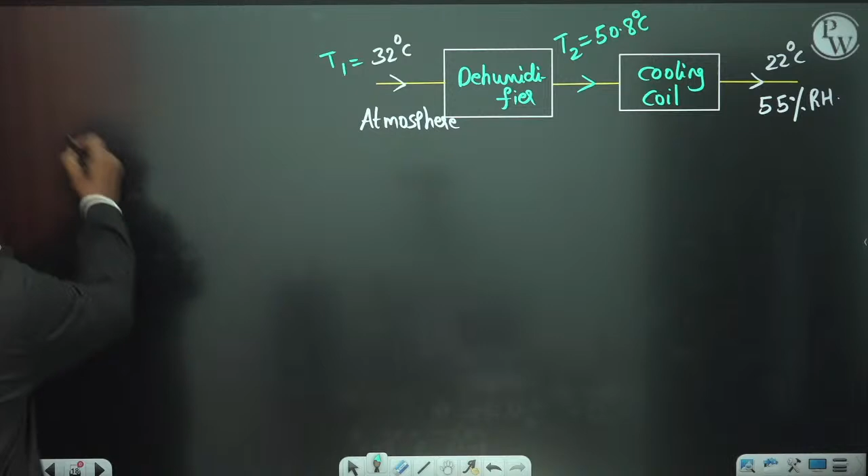Then by passing it over a cooling coil, the quantity of fresh air required is 0.5 meter cube per minute per student. So what is the requirement of the fresh air? M dot air is equal to 0.5 meter cube per minute per student. So this is what we need. Temperature of air after dehumidification is 50.8 and bypass factor 0.3. What are the options?

Capacity of the dehumidifier in kg per hour. So what could be the capacity of this dehumidifier? It means what amount of water can be taken out from the air by this dehumidifier. What is the purpose of dehumidifier? To take out the vapor from the normal wet air. So capacity of the dehumidifier is nothing but,

first of all we have 60 students, so 0.5 into 60 meter cube per minute. So 30 meter cube per minute of air is required, because this capacity is 60 students and this is per student. So this amount of air is actually required. Now capacity of dehumidifier.

The purpose of dehumidifier is to take out the vapor. So this is nothing but m dot a times omega 1 minus omega 2. Because here the substance has omega 1 kg of vapor per kg of dry air, here it is omega 2. So omega 1 minus omega 2 gives you the difference in the water vapor that is taken out from the air. Is this clear? Please type in the chat box.

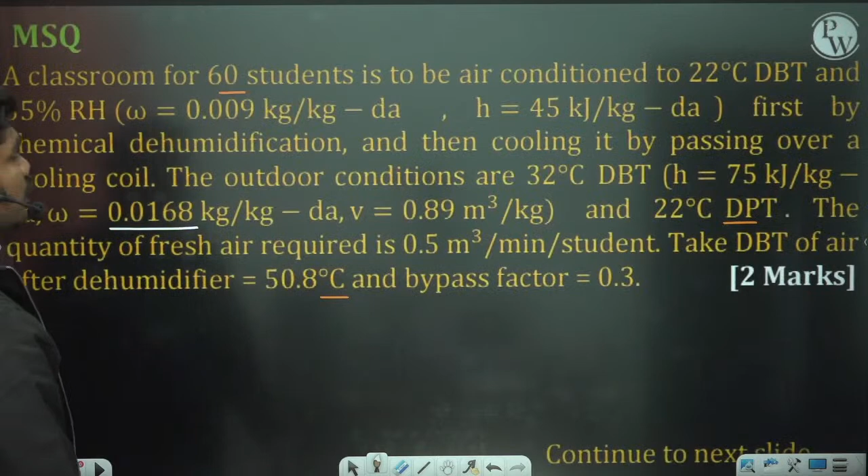This is a cooling coil, only cooling, so omega at this location and omega at this location should be the same. It is doing sensible cooling, not any humidification or dehumidification. So omega 2 should be same as omega 3; there is no addition or deletion of water vapor. So omega 2 can be replaced with omega 3, the required condition in the class, 0.009.

This value is in meter cube per minute, but we want kg per hour. So 30 divided by specific volume at the outdoor conditions, 0.89, into 60. Meter cube per minute divided by specific volume gives you kg per minute, and multiplying by 60 gives kg per hour.

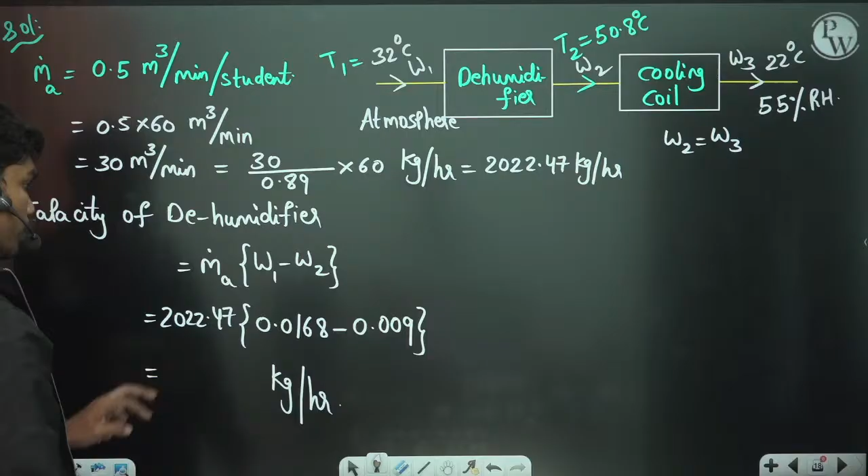2022.47 kg per hour. Okay, so if you put this value here instead of 30, if you keep in kg per hour, so 2022.47. So this capacity of the dehumidifier will be in kg per hour actually. Okay, so let us perform this calculation. This value multiplied with 0.0168 minus 0.009. So 15.77 kg per hour actually.

Okay, so 15.77. So it's given 13.13. Correct? So please type in the chat box. 15.77 is the correct answer. Yes or no? Are you all getting 15.77? Because we have done 30 divided by this 0.89, which is the specific volume, gives you kg per minute actually. Okay, so if you want kg per minute, then if you multiply with 60, you'll get kg per hour. So did you all get this value?

15.77 kg per hour of air is actually supplied to the system. Yes, 15.775. Correct. Okay, so 15.775 kgs per hour is actually supplied to the ventilation system. Okay, now if you see, this is dehumidifier. Then what is the second case they are asking? Capacity of the cooling coil in tons of refrigeration.

You know, 1 ton is equal to around 211 kilojoule per minute. So this, if you convert to second, 211 by 60 kilojoule per second or kilowatts. If you do 211 by 60, it comes out 3.516. Okay, 1 ton is equal to 3.51 kilowatts. Okay, now they're asking you capacity of the cooling coil. So what is capacity of the cooling coil? The cooling coil has taken some heat from the system.

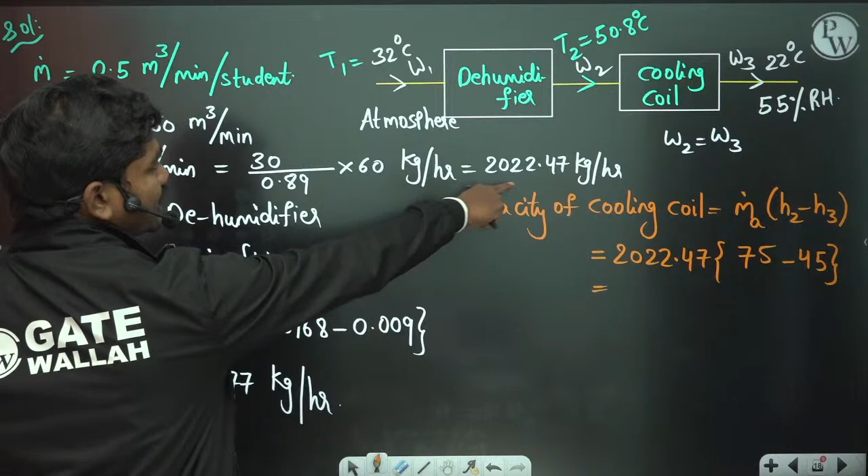2022.47. Okay, so this answer is in kg per hour, but we want in kilowatts. Okay, so if you want in kilowatts, divide with 3600 to get the mass flow rate. So this value divided with 3600. Okay, so we'll get this answer in kilowatts, but if you want in tons of refrigeration, then dividing by 3.51 gives you in tons. Okay, so this is in tons of refrigeration. So let us see.

So 2022.47 divided by 3600. Okay, so this value multiplied with 30 divided with 3.51. So 4.80. What is the value? 4.802 tons of refrigeration. Means 4.802 tons is the capacity of this cooling coil that is placed here. Okay, so 4.8 tons. So let us check. 4.82. Okay, maybe one decimal place here can change this first decimal. So we can take it reasonably as the correct answer. 4.802, yes, of course.

Okay, so if you slightly round off this 4.82, because there could be possible changes in the decimal values when you are taking this specific humidity calculations or anywhere here. So 2022.47, all these things. Similarly, some people put 3.6 here, 3.47, all these general adjustable values. So 4.802 can be taken as correct answer here. Okay, so D is correct. 3.26 is actually wrong answer in this case.

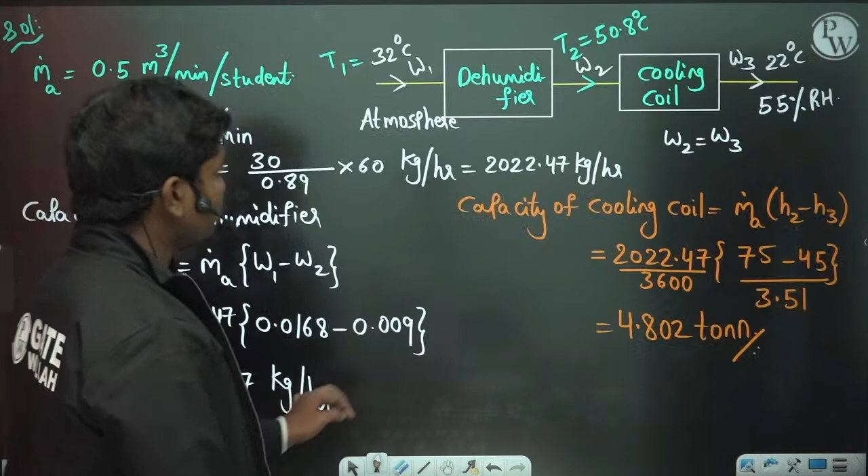Bypass factor is given, which is 0.3, correct? So whenever this is the cooling coil, if you want to calculate the bypass factor, first of all, here the temperature is 50.8, here it got cooled to 22 degrees Celsius. Now out of this, some part of the temperature is used for cooling the system actually to bring this to the dew point temperature. So we can write this capacity, this bypass factor is equal to T3 minus apparatus dew point temperature by T2 minus apparatus dew point temperature again.

Okay, so if you say this 0.3 is equal to T3, the system when it is supplied to the students, that's at 22 degrees Celsius. So 22 degrees Celsius minus dew point temperature by T2 after dehumidification. What is the temperature? 50.8. So 50.8 minus dew point temperature. Okay, so this is from the definition of the sensibility bypass factor of the cooling coil.

Okay, so if you do this calculation, 0.3 times of 50.8 minus apparatus dew point temperature is equal to 22 minus temperature of apparatus dew point temperature. So this is 0.3 minus 0.3 and this is minus T. So if this comes to the left hand side, so 0.7 TADP is equal to 22 minus 0.3 times of 50.8. Okay, correct. So 0.3 times of 50.8 and this is 22, minus and TADP positive. Okay, so TADP apparatus dew point temperature is equal to how much?

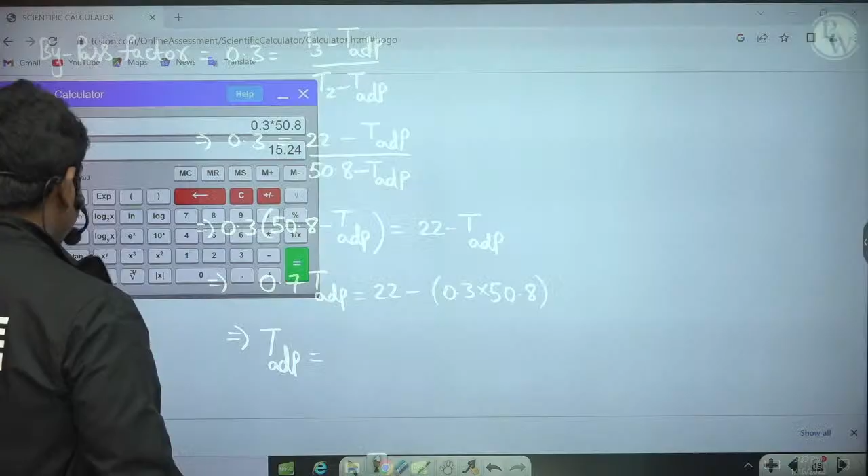If you perform this calculation, let us see. 0.3 into 50.8, so 15 point something, 15.24. So subtract this from 22, 6.76 divided by 0.7, so 9.657 degrees Celsius. So this is the apparatus dew point temperature at this condition. So 9.657, that can be written as 9.67.

So C and D are the correct answers in this case. Clear? Yes or no? So please type in the chat box. Hi others, so is this clear to all of you? This calculation is slightly different because decimals can change the first decimal when you're dealing with such values, but C and D are the correct options in this case.

Okay, so dehumidification means basically, if you see, I would like to show it on a psychrometric chart. You can see generally, if I want to explain, I'll take a minute and I'll explain. So this is the dry bulb temperature and specific humidity omega on this axis.

Okay, so initially they are at some condition, then they dehumidified it, okay, at constant enthalpy generally, and then they have done some sensible cooling like this. This is what they have done actually. Okay, so state 1, for example, state 2, state 3, this is the dehumidification process and this is the sensible cooling process.

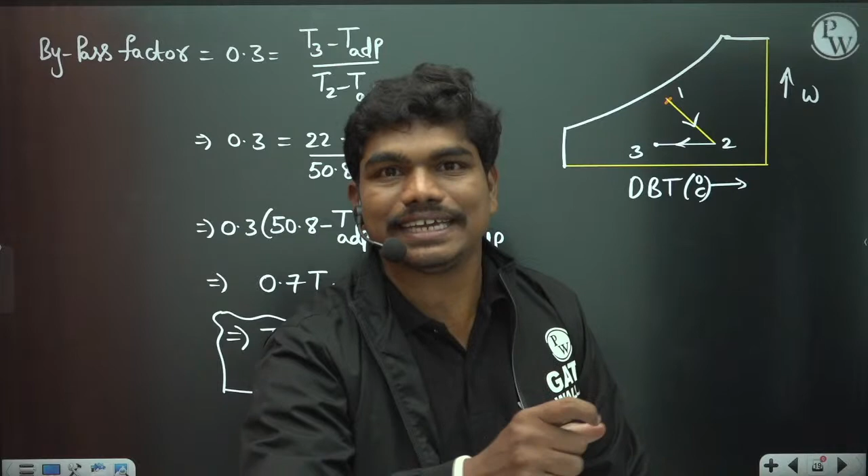The main point I like in GATE is what values they give in questions. Those are practical values, not just default values like thermal conductivity figures. Many times the values match actual physical values. I identified this during my research - when doing experiments in fluid mechanics, I found skin friction coefficient and drag coefficient values exactly matching what you get in the lab. This is one very good thing that happens.

So I've done GATE revision and PYQ, now what should I do? Any suggestions - try to attempt some test series. If you're already doing one, that's good. But try to write a test series, because the main purpose is that if you're committing any mistakes, you'll generally come to know through test series. People feel they're thorough with a formula or concept, but at the end they make calculation mistakes. This should not happen generally.

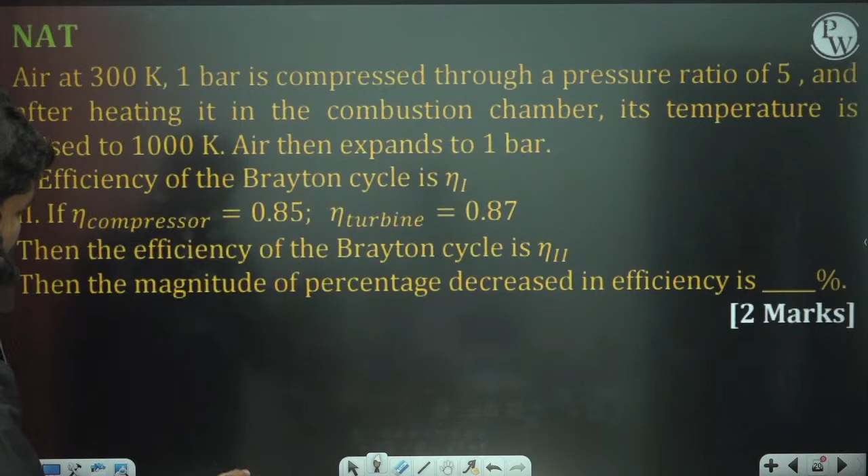Let's go for the next question quickly. Air at 300 Kelvin and 1 bar is compressed to a pressure ratio of 5, and after heating in the combustion chamber its temperature is raised to 1000 Kelvin. It then expands to 1 bar. Efficiency of the Brayton cycle is eta 1. If isentropic efficiencies of compressor and turbine are 85% and 87%, generally these are in the range of 85 to 90%, then the efficiency of the Brayton cycle is eta 2.

Then the magnitude of percentage decrease in efficiency is to be found. So in the first case it's an ideal cycle - straight heating and falling, but in the second case the compressor and turbine have certain isentropic efficiencies. Whenever there are isentropic efficiencies, your heat input increases and work output falls, so there's some decrease in cycle efficiency. They're asking for the magnitude of percentage decrease, meaning eta 2 minus eta 1 by eta 1 into 100. This is negative since case 2 will be less than case 1, but they're asking only for the magnitude.

Before GATE 2023, regarding a marathon session on fluid mechanics, hydraulic machines and thermal portion covering only formulas and concepts - yes, it is on the plan, but I won't be taking that since I was engaged with other classes. Other people from the same team are taking it. There you'll have some revision sessions covering all the concepts and formulas - it's like a quick go in a single video, and you'll have a lot of questions there.

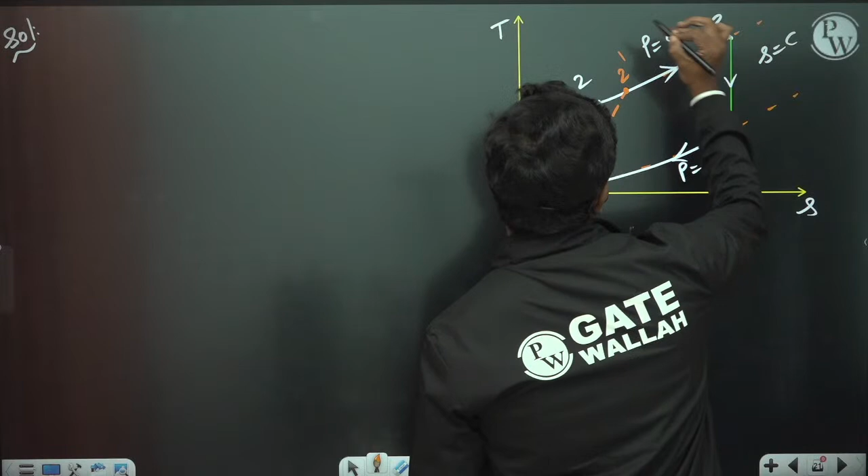Now practically what happens, because of the heat loss and all, this develops certain isentropic efficiencies. For example, in this case, if you see this compressor, instead of following this path, there is some irreversibility and it ends up somewhere here. Similarly, this turbine, instead of isentropic expansion, there is a certain increase in the entropy, and it goes for some irreversible expansion.

So basically, because of the adiabatic heat losses and friction, these compressions and expansions deviate from the isentropicness, or adiabaticness. So therefore we plot these temperatures T2 dash and T4 dash.

Now many of you may have a doubt, why I have made an expansion like this, why not like this? Because in an irreversible process, the entropy change is always more than the entropy change of a reversible process. Of course the pressure is same, but temperatures are actually changing here. If the pressure and temperature are same, then the entropy change is same, because entropy is a point function. But here, because of the friction and all, physically the molecules collide with the blades and the temperature will actually increase at the compressor and turbine cases.

Now if you see, they have given you in the first case, let us calculate T2, T3, T4 values. First of all, we know one thing: T1 into T3 is the same as T2 into T4, correct? This relation holds good for the Otto cycle also. So see here, T1 into T3 equals T2 into T4.

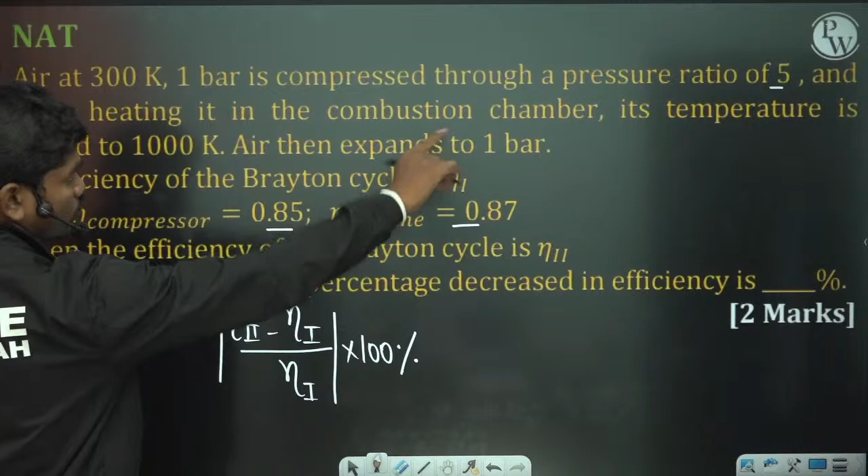Now if you see, initially, what is the compression, this pressure ratio is 5, which is RP generally. So what is the thermal efficiency of the Brayton cycle generally? 1 minus 1 by pressure ratio to the power gamma minus 1 upon gamma, correct? This is the efficiency expression for Brayton cycle efficiency if you have a pressure ratio and also the ratio of specific heats, correct?

So please type in the chat box, yes or no. Whenever you have a pressure ratio and also we know the ratio of specific heats, then RP to the power gamma minus 1 upon gamma is what you have here, correct? Please type in the chat box, have you seen this expression anytime? Pressure ratio to the power gamma minus 1 upon gamma.

So here we have the pressure ratio and gamma; the fluid is air because we are taking air into the picture. So gamma value, RP is 5 and gamma is 1.4. It's a diatomic gas. So normally, for any monatomic, diatomic, or triatomic gases, the Cp by Cv value is 1 plus 2 by F. This F is called degrees of freedom for the molecules, which we will discuss in detail sometime later because this is just a short course.

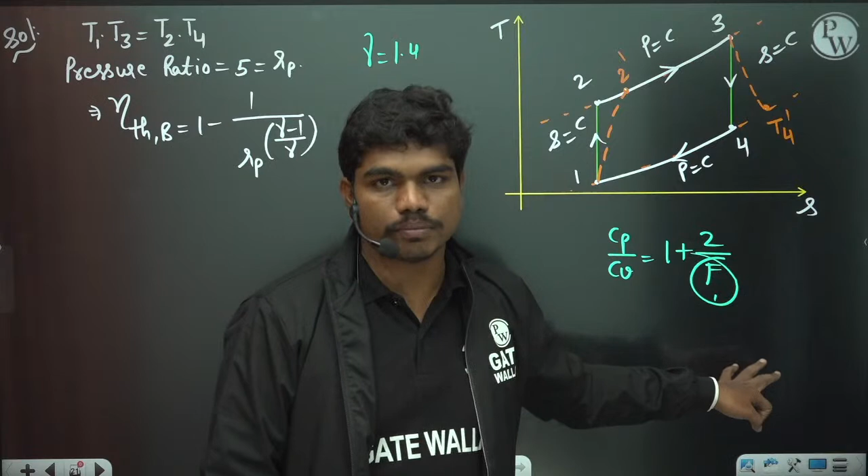So this F, normally for monatomic gases, F is 3; for diatomic it is 5, and for triatomic it is 6. So that's how, when you put 3 here, we get 2 by 3 is 1.67. Gamma for monatomic gases is 1.67. This degrees of freedom is 5 for diatomic gases, so 2 by 5 is 0.4, so 1.4 is for diatomic gases. For triatomic it is 6 actually, so 2 by 6 gives you 1 by 3, which is 0.33. That's how we have the specific heat ratios in this case. Clear?

So anyhow, if you see this, eta 1 in the first case is 1 minus 1 by RP, 5 to the power gamma minus 1, 0.4 by 1.4. So if you do this directly, then we'll get 5 power 4 by 14. Okay, 0.4 by 1.4 anyhow. So reciprocal of this and subtract this from 1.

So 0.3686, correct? Did you all get 0.368? Yes, 0.3686. Okay, good. So this is the first case. So first case efficiency is how much? 0.3686. Good. Now what about the second case?

Let us see. In second case, the compressor and turbine have got some adiabatic isentropic efficiencies. Okay, so isentropic efficiency of compressor, if you see, normally whatever the work you need in the ideal case, divided by the work you are actually putting in. Obviously actual work you have to put will be higher, because in the ideal case this is isentropic, there are no heat interactions.

Okay, but here there is certain amount of irreversibility in the system, so we write this as T2 minus T1 divided by T2 dash minus T1. Correct. Similarly, in case of isentropic efficiency of turbine, T3 minus T4 dash divided by T3 minus T4. Okay, so this difference is larger, so T3 minus T4. These are the values that you have.

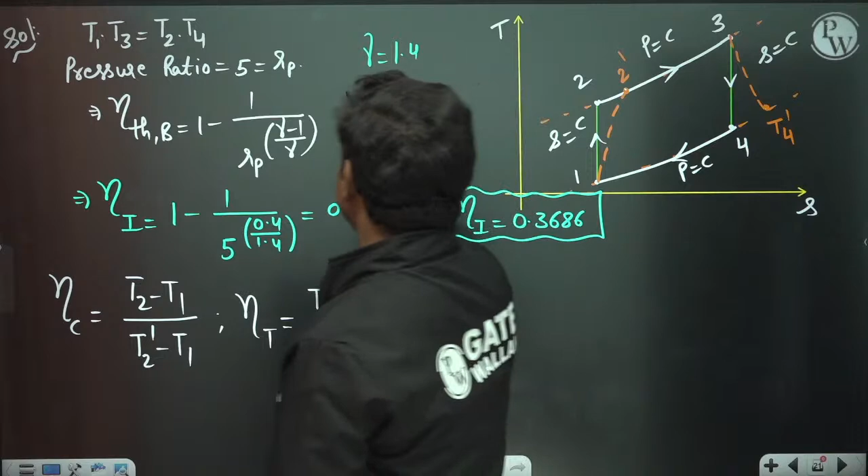Now, first of all, to get this T2 dash and T4 dash, because for calculating efficiencies we need them, we have to identify what is T2 and T3 here. In this case, T1 is known to you. P1 is 1 bar, which is 100 kilopascals, and T1 is how much? T1 is 300 Kelvin. Okay, so we have 300 Kelvin. Let me take one empty slide.

Fine. Now T2, let us see, pressure ratio 5, and after heating in the combustion chamber, its temperature is raised to 1000 Kelvin. So T3 is 1000 Kelvin. So if you can calculate T2, then just by using this relation, you can calculate T4 easily. Okay, so how do you calculate T2?

For process 1 to 2, what we know, P1 power 1 minus gamma into T1 power gamma is equal to P2 power 1 minus gamma into T2 power gamma. So T2 is equal to T1 times P1 by P2 whole power 1 minus gamma upon gamma. This can be written as T1 times P2 by P1 whole power gamma minus 1 upon gamma, because by swapping these two you can change the minus sign. So P2 by P1 is the pressure ratio, P2 by P1 or P3 by P4.

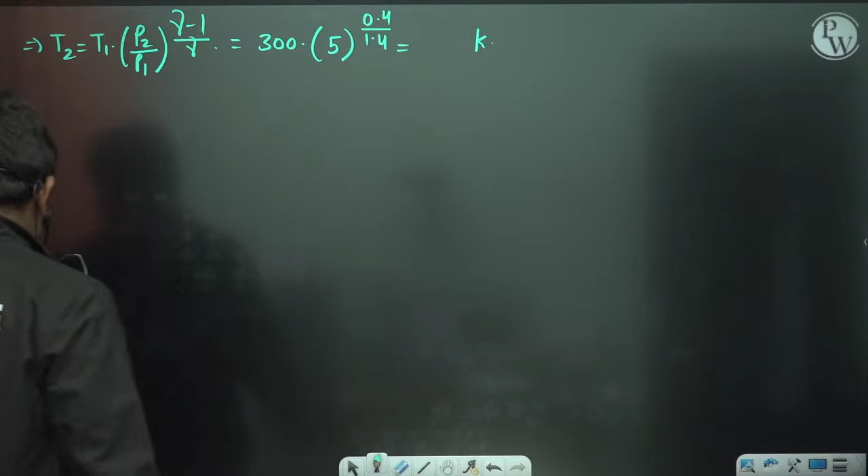This value is 5. So T1 is 300 Kelvin into 5 power 0.4 by 1.4. If you calculate this value, 5 power 4 by 14, this is 1.58 something multiplied by 300. So 475.145 Kelvin. Okay, so T1 is known, T2, so T4.

What about T4 in actual process? In ideal case, T4 is T1 into T3 by T2. This is 300 into 1000 by T2, and T2 is 475.145 Kelvin. So how do you get this? Reciprocal of this into 300 into 1000. So 631.38 Kelvin.

Now here you might have observed one thing. Whenever I have done this TS diagram, I have done a bit of a mistake actually. This T4 should always be higher than this T2. I have just done it for diagram purposes because I cannot draw it to scale, but physically the exhaust gas temperatures should be higher than the temperatures after compression. This advantage of having higher temperature we will use in a concept which is called regeneration.

Normally, even in HPCL and all, when we are working, we used to do it. So what we do is, whatever exhaust gases are coming out of the turbine, we pass them over a loop of the gases after compression, so that some part of the heating of the gas coming out of the compressor is done with the help of this exhaust gas loop. So that we save some part of energy.

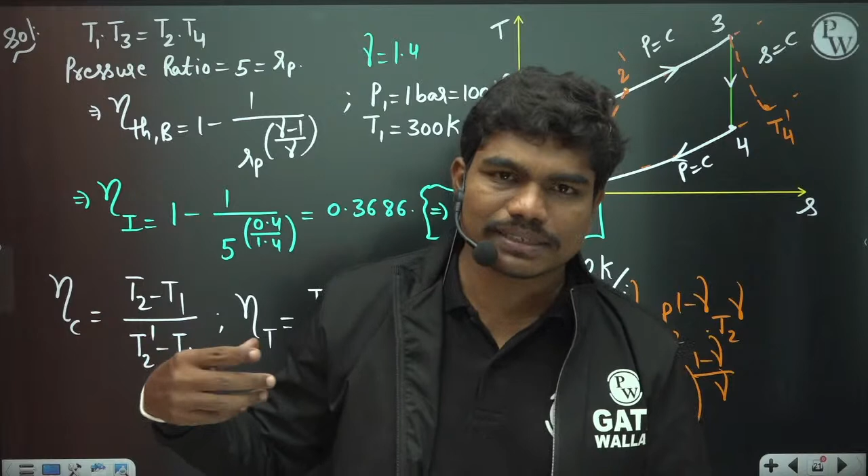And normally, intercooling is one very good technique in case of compression. In industries where I have worked previously, we have seen compressors of 18 stage or 21 stage intercooling. Normally we do 2 stage intercooling, at maximum 3 stage intercooling in books, but practically when you go to industries there are very high stages of compression. So that's what we do. Anyhow, this is what we have.

So now, T2 dash is equal to T1 plus... or first of all, let us see: isentropic efficiency of compressor is equal to T2 minus T1 by T2 dash minus T1. So T2 dash is equal to T1 plus T2 minus T1 by efficiency of compressor.

Similarly, what about the isentropic efficiency of turbine? Isentropic efficiency of turbine is T3 minus T4 dash by T3 minus T4. T4 dash from this equation is T3 minus isentropic efficiency times T3 minus T4. So this is what we have actually.

So if you perform this calculation, T2 dash is how much? T1 is 300 Kelvin. So 300 plus T2 minus T1, which is 175.145, divided by isentropic efficiency of the compressor. The compressor has isentropic efficiency of 0.85. Normally, even in industries, it's around 0.88 or 0.9; 85 to 90% it fluctuates. Here it's given 0.85.

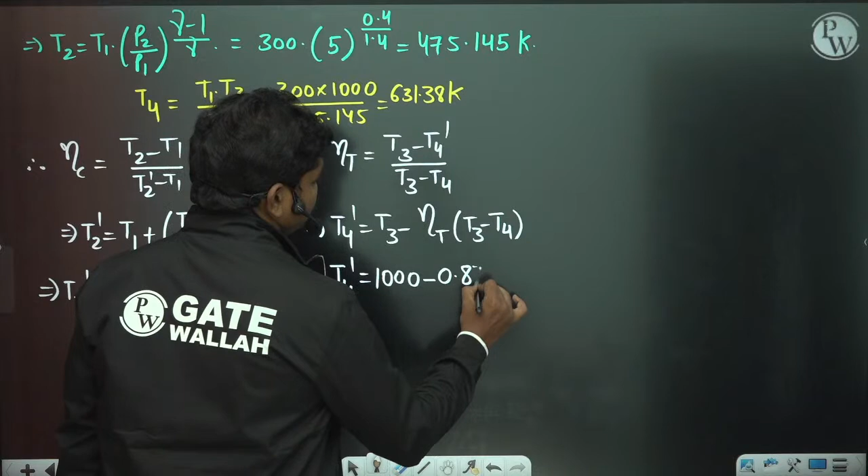Now, T4 dash is equal to T3, which is 1000, minus isentropic efficiency of turbine 0.87 times T3 minus T4. So 1000 minus 631.38, this value multiplied with 0.87, then subtract this from 1000 again. So 679.3 Kelvin. This also should be higher than T4.

679.3 Kelvin. These are the intermediate checks. You can check meanwhile whether your calculations are going on the correct track or not using these simple concepts: T2 dash should be higher than T2, T4 dash should be higher than T4.

Now, in case of eta 2, it's net work interaction by heat supplied. So the thermal efficiency in the second case is Cp times the actual work done by the turbine, T3 minus T4 dash, minus the compressor work input, T2 dash minus T1, divided by heat supplied, which is Cp times T3 minus T2 dash.

Because in the actual case, the work developed by the turbine is only due to the expansion 3 to 4 dash, compressor work input is 1 to 2 dash, and heat supplied is only from 2 dash to 3. That's why we have these terms. If we cancel out Cp, we have T3 minus T4 dash, that is 1000 minus 679.3, minus T2 dash minus T1.

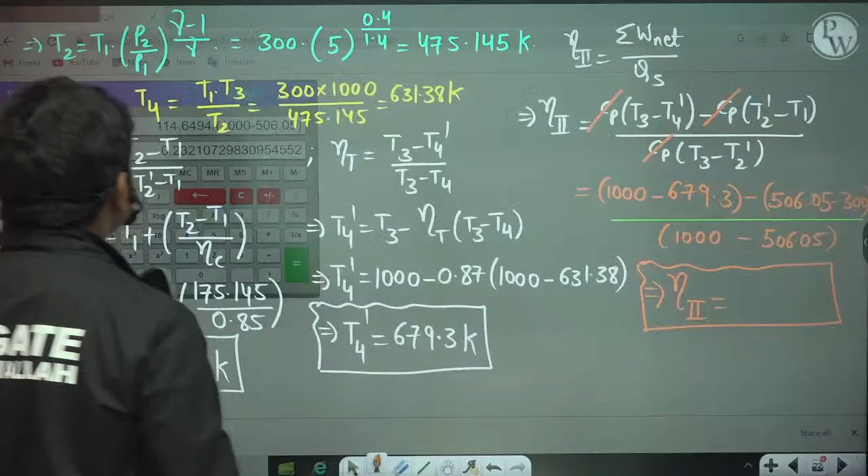Okay, so let us perform this calculation. 1000 minus 206.05. Okay, so 114 point something divided by 1000 minus 506.05. Okay, so 0.2321. And previously what is the thermal efficiency in case 1? 0.3686. So if you calculate this value, therefore eta 2 minus eta 1 modulus divided by eta 1 into 100 is equal to how much? This is the percentage decrease in the efficiency.

So if you calculate this 0.2321 minus, this is how much in the first case? 0.3686, correct? So this value divided by 0.3686. Anyhow, we need only magnitude. So into 100. So it's almost some 37% loss, 37.03. Almost some 37% loss in the efficiency because of some 15% changes in the isentropic efficiencies of the turbines and compressors.

In power plant, compressor plays very important role, because the reason is the turbine blade casings and all. Yes, 37% is correct answer. So if you see, this compressor is one very important device because whatever the net effective work output you can take from the turbine, or the work ratio, W net out of whatever is produced by the turbine, this mainly depends upon the compressor. So the compressor should be set with stages of intercooling; that's why 18 stages, 21 stages are kept, because work given to the compressor should be less.

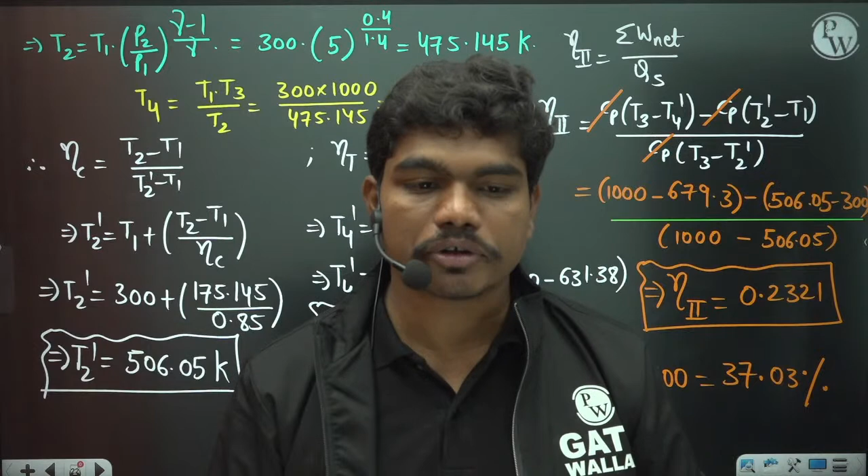If you get 60 to 70 marks in the GATE examination after 2021, your rank and score is good enough to give you a PSU. But if your target is the XE engineering sciences paper, definitely plan for more than 75 marks. If you get more than 75, your score is good enough for admission in IIT in the core branches like thermal, design, manufacturing, or recent branches like nanotechnology. Make sure a target of 75, which you can get by writing test series and PYQs. If you prepare your PYQs well, it will be very good.

How to approach such lengthy questions in exams? Look here, since my intention is to revise the maximum number of points in a single question, I have intentionally kept these questions lengthy, but you have seen many of the questions in previous years, they are very simple. Only a few questions will be lengthy, especially when questions come from the Rankine cycle. When they ask about a Rankine cycle, sometimes they don't give the dryness fraction values, so you have to calculate by using entropy equations. At that time it will be a little lengthy.

But here I have set the questions in such a way that you will use the majority of the points to solve one question, so that will be a good revision. For example, tell me honestly, we have been doing this for almost 2 hours till now. So to solve these questions, will you need 2 hours in the exam? No, hardly; every question will be solved in 4 to 5 minutes.

But what kind of points have we discussed here? We have discussed so many good points, correct? My intention is to touch all those good points whenever we are solving these questions. That's why I have intentionally asked all these things. Otherwise I could give you just 'calculate the isentropic efficiency of the compressor', these kind of questions, right? But that's not the case. Okay, fine.

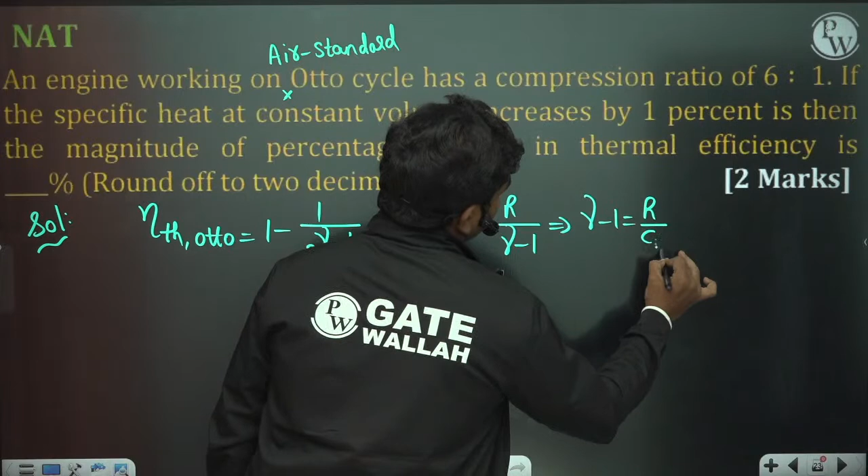Here the main point of interest is the specific heat at constant volume, CV. CV can be written as R by gamma minus 1. So gamma minus 1 can be written as R by CV. And once you fix the substance, the characteristic gas constant is fixed, because the universal gas constant doesn't change and the molecular weight of the substance doesn't change. So gamma minus 1 is equal to R by CV.

So this implies thermal efficiency is equal to 1 minus 1 by r to the power R by CV. Gamma minus 1 is R by CV. So this is r to the power capital R by CV. This can be written as 1 minus small r to the power minus capital R by CV. So this is the relation.

So if you want to find, for a change in CV, the change in thermal efficiency, let us go for differentiation, but let us use some mathematical things to simplify it. 1 minus eta is equal to r power minus R by CV, and if you apply log, ln of 1 minus eta is equal to minus R by CV into ln r. It is easy to differentiate in this form, because differentiating directly will be a little complicated, e power minus 1 by x differentiation and all.

So now differentiating both sides, let us not differentiate with respect to any variable, let us just differentiate. Differentiation of ln 1 minus eta is minus 1 by 1 minus eta into d eta, equal to, since R is constant and the compression ratio of the engine is also constant, minus R times ln r times the differential of 1 by CV, which is minus 1 by CV square into dCV. So minus of minus gets cancelled.

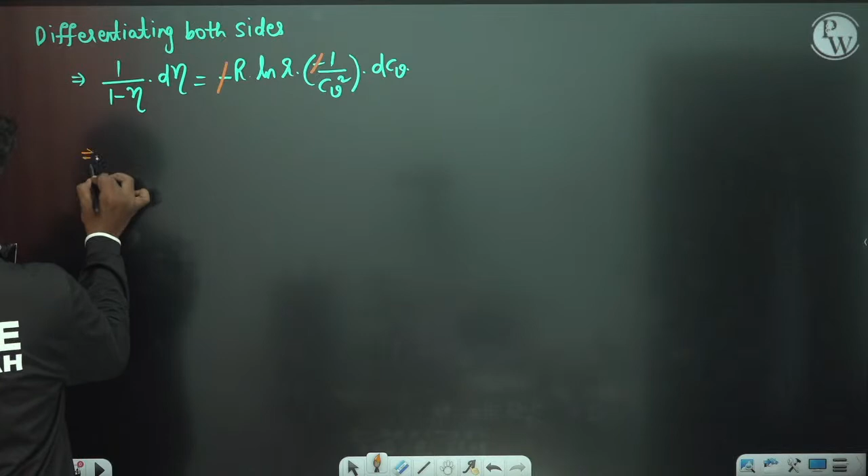Now we can write d eta upon 1 minus eta is equal to R times ln r, which is anyhow constant. R can be written as CV times gamma minus 1, into ln r by CV square into dCV. So CV gets cancelled, and we see d eta by 1 minus eta is equal to gamma minus 1 times ln r into dCV by CV.

Now multiply by eta on both sides, and this gives you d eta by eta, because we want the percentage change in thermal efficiency. This is a fractional change, so if you multiply by 100 we'll get the percentage change. So d eta by eta equals 1 minus eta by eta into gamma minus 1 into ln r into dCV by CV.

So first of all, let us calculate the eta value at this condition. The compression ratio given is r equal to 6, and gamma is 1.4 in an air standard cycle. So thermal efficiency is 1 minus 1 by r power gamma minus 1, which is 1 minus 1 by 6 power 1.4 minus 1, which is 0.4. So 6 to the power 0.4, reciprocate this and subtract this from 1.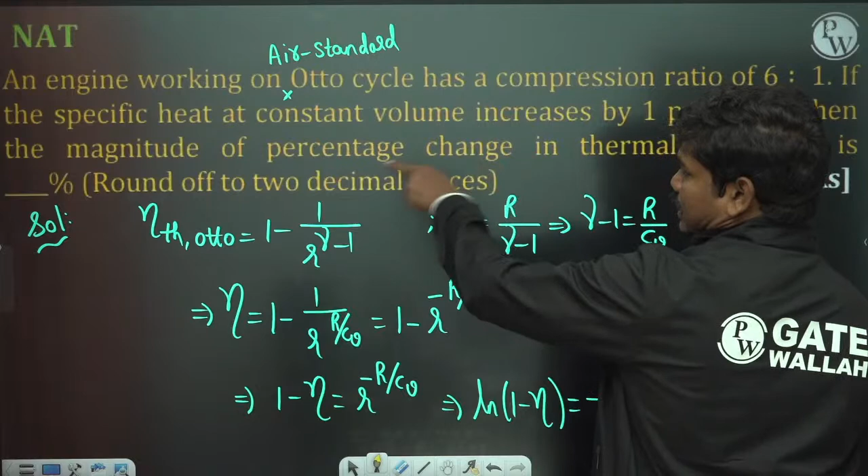So let us substitute in this relation. It is given Cv changes by 1%, the magnitude of percentage - specific heat at constant volume increases by 1%. So let us multiply 100 on both sides, then this gives percentage change. This value here, the percentage increase, is given as 1 unit, so this quantity is 1, it is 1%.

So let us keep eta and gamma value known to you, R is known to you. So if you keep percentage change in thermal efficiency, it is equal to d eta by eta into 100, which is equal to 1 minus eta by eta. So eta value is this - let us store this value. So this is the thermal efficiency, so 1 minus eta.

Divided by eta again, so 0.95, this value into gamma minus 1, so into 0.4, into ln R - R value is 6, so ln 6, into ln 6. So this value is 0.684 into 1 actually - this value is actually positive, correct?

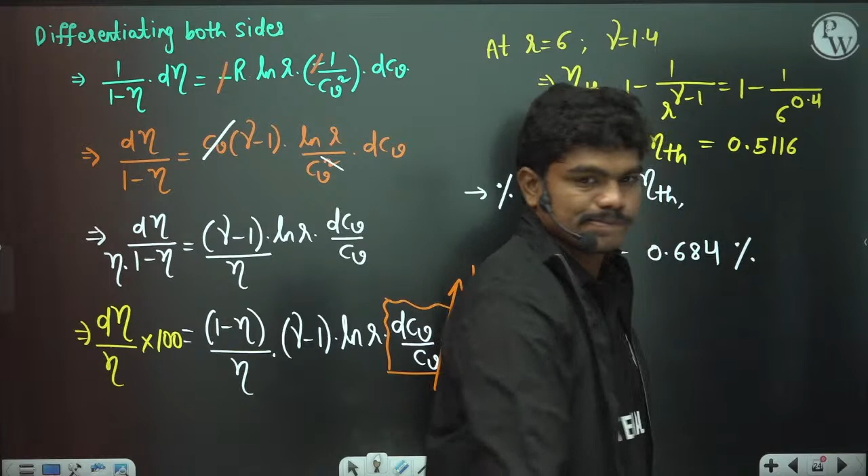Right? So please type in the chat box - is this clear? Yes or no? So type in the chat box, is this clear to all of you?

Look, here I want to tell you one thing. Normally we assume Cp and Cv values constant within this temperature range of these cycles. The reason is this, you might have understood. Normally for some compression ratios, when Cp Cv changes by 1%, this is in percentage, so it is less than 1%. That's why the changes in Cp and Cv are not much taken into the picture whenever you are dealing with cycles.

Okay, fine. So shall we go for one more question? Please type in the chat box - shall we go for one more question? Are you all liking the questions? Yeah, okay good, so let's go for one more question.

Okay, some big question is there. Fine, let us see what is this big question. Consider a gas turbine power plant operates on a simple Brayton cycle, between the pressure limits 100 kilopascals and 700 kilopascals, so pressure ratio is 7.

Air enters into the compressor at 30 degrees Celsius with a flow rate of 12.6 kg per second and leaves at 260 degrees Celsius - so air leaves the compressor at 260 degrees Celsius. Now this air and diesel fuel with an air fuel ratio of 60 are burned in the combustion chamber with a combustion efficiency of 97%.

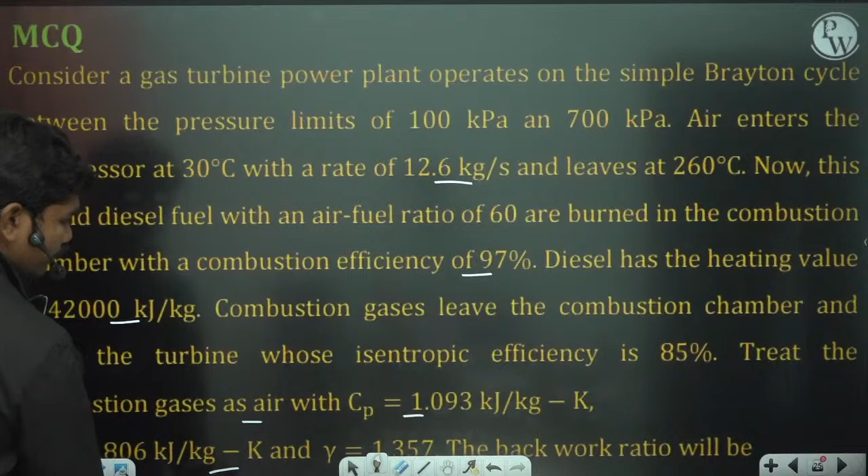The back work ratio will be - okay, so first of all tell me, some options are also given. Good, what is back work ratio? So please tell me, what is back work ratio? The previous thing what I'm talking about - okay, so out of the turbine generated work, what part is actually consumed by the compressor? That's what it's called back work ratio, and your job as an engineer is to minimize this back work ratio. Otherwise what happens - whatever your turbine produces, the same will be going to the compressor again, so it will be difficult. So let us see, they're asking about

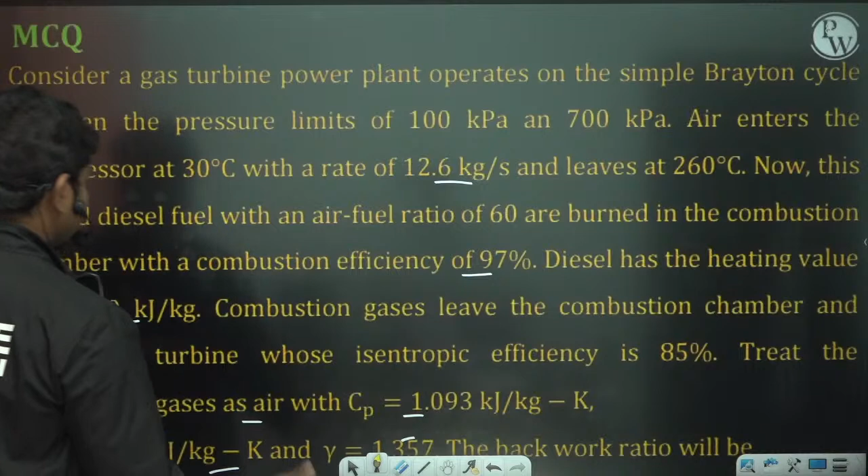Now let us see what they have given. Let us read the question: between the pressure limits 100 kilopascals and 700 kilopascals, so the pressure ratio is 7. So P1 and P4 are 100 kilopascals, and P2 and P3 are 700 kilopascals.

So if these are 700 kilopascals, then air enters the compressor at 30 degrees Celsius. So what is T1? T1 is 30 degrees Celsius, so 273 plus 30, which is 303 Kelvin.

Then mass flow rate is 12.6 kgs per second, so the mass flow rate of air, m dot A, is 12.6 kgs per second, and it leaves the compressor at 260 degrees Celsius. So what is T2? 260 degrees Celsius, meaning 273 plus 260, which is 533 Kelvin.

Now this air and diesel fuel with an air-fuel ratio of 60 are burned in the combustion chamber. So what is the air-fuel ratio? M dot air by m dot fuel is 60 - they have given 1:60 as the air-fuel ratio. So if mass of air to mass of fuel is 60, then the mass flow rate of fuel is mass flow rate of air, which is 12.6 by 60, which is 0.21 kgs per second, the fuel flow rate into this combustion chamber.

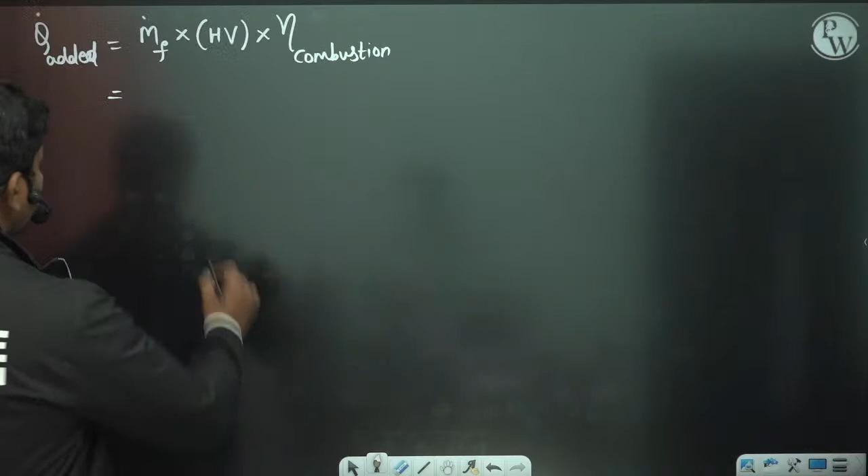So what is the mass flow rate of fuel here? It is 0.21, into the heating value - the calorific value is 42,000 kilojoules per kg, and the combustion efficiency is 97%, so 0.97. So this many kilowatts is generated as power - this much amount of heat is actually supplied. So 0.21 into 42,000 into 0.97 gives us 8555.4.

Now if this is the case, then what about T3? This amount of heat supplied is nothing but the heat change in this process. So this implies 8555.4 is equal to mass flow rate of the complete substance, air plus fuel, into Cp into T3 minus T2. So let us calculate this value: 8555.4 is in kilowatts, and mass of air plus mass of fuel - air is 12.6 and fuel is 0.21 - so 12.81 is the total mass that is sitting here.

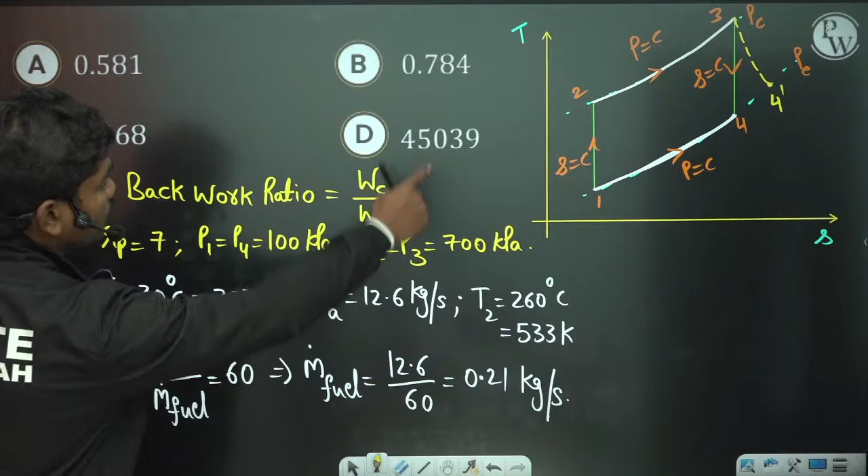So 8555.4 into Cp is asked to be taken as 1.093, into T3 minus T2. So what about T3 minus T2? T3 is not known to you, T2 is known to you, 533. So T3 minus 533 gives you the T3 value, in some Kelvin. Look, this is in kilowatts, so we have substituted this in kilojoule per kg Kelvin.

So if you calculate this value, 8555.4 divided by 12.81 into 1.093, this gives 611.04. So T3 minus 533 equals this value, 611.04. So plus 533 gives you 1144.04 Kelvin.

Yes, 8555.4 is the heat which is added, and that gives you a temperature rise of the mixture to 1144.04 Kelvin. So this is the final or maximum temperature of the Brayton cycle at this location.

Now, finally, what are they asking you? Combustion gases leave and they're asking for the back work ratio. So for calculating back work ratio: work given to the compressor is Cp times T2 minus T1, where T1 and T2 are known to you, divided by Cp times T3 minus T4.

T3 we have just calculated. Now how to calculate T4 actual? The isentropic efficiency of the turbine is given, which is T3 minus T4 dash by T3 minus T4, correct? So what is T4 actually?

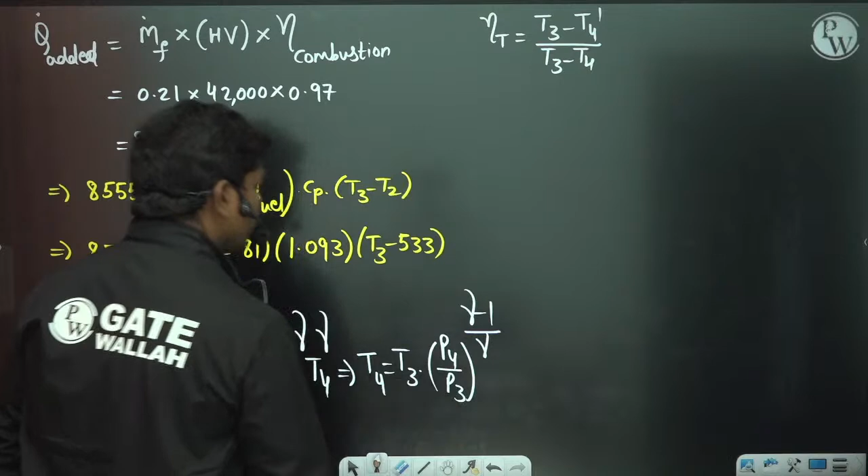Ideally, if the expansion is isentropic, this gives you P3 power 1 minus gamma into T3 power gamma equals P4 power 1 minus gamma into T4 power gamma. So this gives T4 equals T3 times of P4 by P3 whole power gamma minus 1 upon gamma. Because P3 by P4 to the power 1 minus gamma is there, if you swap those two, you get P4 by P3 to the power gamma minus 1.

So ideally, what is T4's value? P4 by P3 is 1 by 7, because the pressure operating range is 100 kilopascals to 700 kilopascals. So this is T3 into (1 by 7) whole power 0.4 by 1.4. This bracket has to be used carefully. So the value comes to 656.123 Kelvin.

So this is the ideal T4, in case of ideal expansion. But here the turbine has got some isentropic efficiency, so therefore the actual value T4 dash is T3 minus isentropic efficiency of the turbine times T3 minus T4.

So T4 dash equals T3, which is 1144.04, minus isentropic efficiency of the turbine. In this case, isentropic efficiency of the turbine is 85%, so 0.85 into T3 minus T4, where T4 is 656.123.

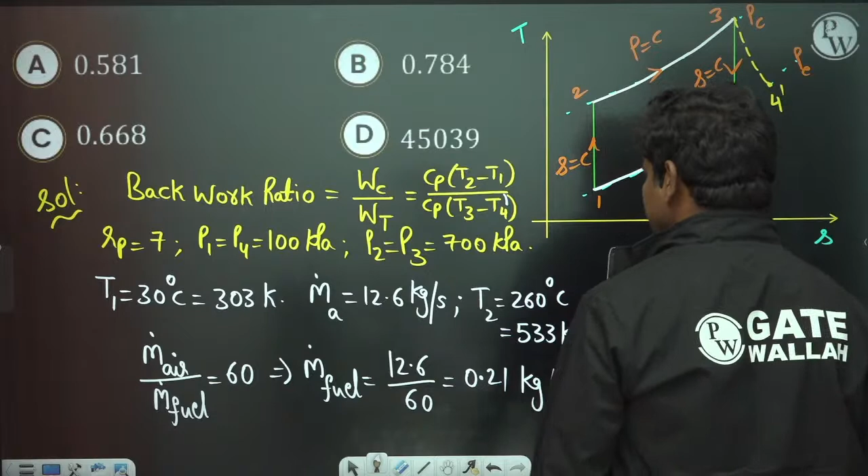So 729.31 Kelvin. Therefore your back work ratio equals, so if you see we need these values - this is T4 dash actually, because the turbine has got some isentropic efficiency. So it's T2 minus T1 by T3 minus T4 dash.

This is 533. So T2 is how much? 533 minus T1. T1 is given as 303 Kelvin. So this is 303, divided by T3 which is 1144.04 minus T4 dash, which is 729.31.

So back work ratio in this case, whatever calculation you get, that's the correct answer. Our values are matching: 656, 729.31 correct. So let us calculate this: 533 minus 303, divided by 1144.04 minus 729.31, which gives 0.5545, approximately 0.554. This is the back work ratio.

So you can see almost 55% of the turbine work is being consumed by the compressor, which is a big loss. But in case of Rankine cycles and all, what happens? In case of Rankine cycles, the pump consumes a very small part of the work.

But practically putting a hydroelectric power plant, you need a lot of accessories and requirements. But for putting a gas turbine power plant, it's very simple. Only thing you have to look is fuel. But this 55%, you can see clearly the values, and these are the normal range of values. Combustion chamber efficiencies will be around 95% also.

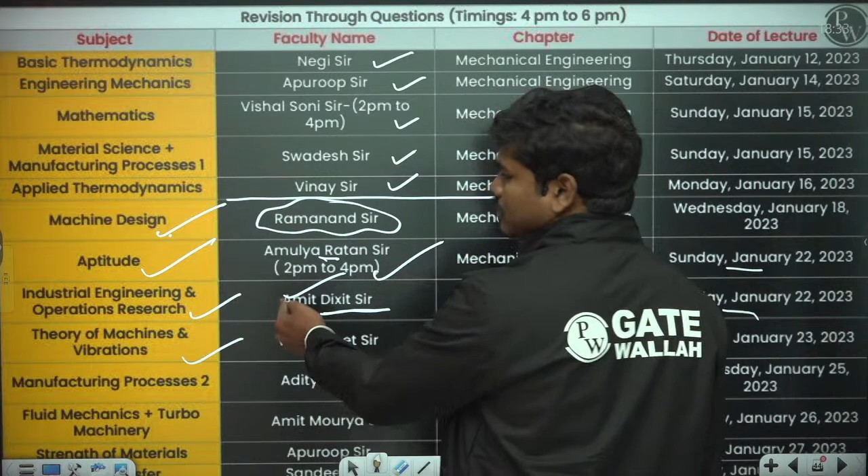So if you follow these things, definitely, like for example in today's class you have got some good idea on all the remaining things. Look, there are some standard things which come out. For example, for maximum work output, what is the compression ratio, what is the pressure ratio for maximum work output, all these things are common, and you might have known these formulas many times. So that's why I didn't keep questions on them. I have kept some detailed questions on other things.

Okay, clear? So please type in the chat box, is this clear to all of you? How many of you liked the session? How many of you liked the questions actually? Session means not hitting the like button, I mean practically. How many of you liked the questions that we solved here?

We have tried to touch all the things, but I understand it's a short session of only 2 hours. So obviously we cannot touch 100% of the concepts involved, but I tried my best to put up some good questions for you.